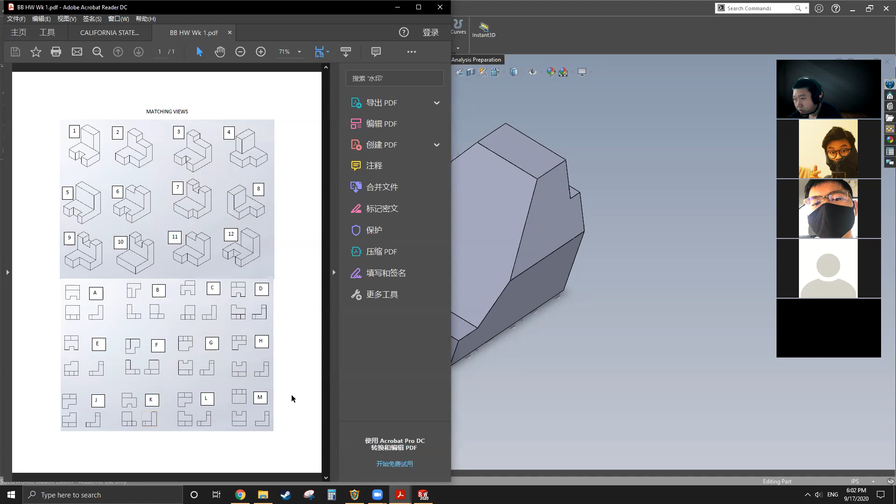You upload files. On Blackboard, you can easily upload a Word doc or a PDF or a text. Like how do you submit your other classes' homework if you don't use Blackboard? I'm confused because when I was attending Cal Poly, anything submitted to Blackboard was really straightforward. Lab reports and project reports and all the stuff we just submitted through Blackboard. We barely turned in hard copies. And this semester, a lot of students ask me how they submit their homework. So I'm confused. Is it something changed, or is it because it's your first year you don't know how to submit through Blackboard?

I think a lot of classes are using external apps. Oh, really? Like, for example, which one? Like Sapling Learning, My Math Lab, a bunch of different programs. Oh, I see. That's kind of advanced. I remember I only used some external apps for my physics and chemistry classes because they have their homework built in, the problem statement, and you just do the multiple choice or fill in the blank. But this one, you just click on homework one, and then you can browse your computer and upload the file you want to.

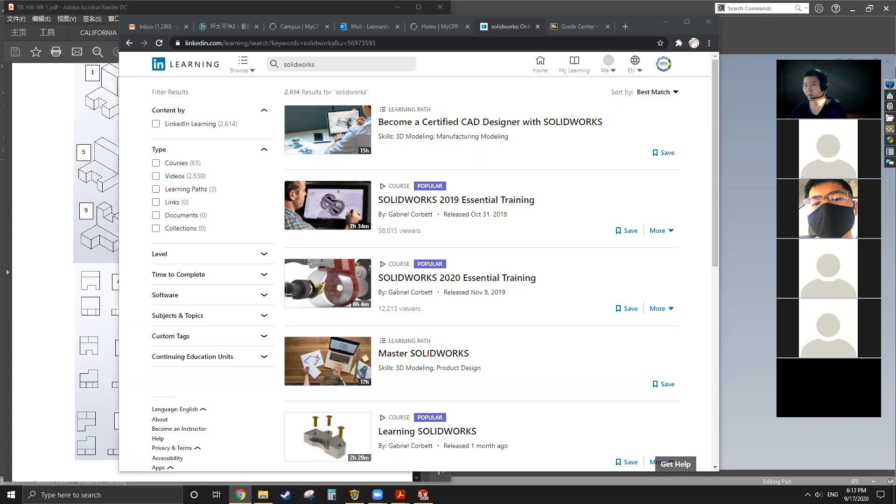I just want to know if somebody is really behind, so I can particularly help the individual. I don't want somebody falling behind since day one and they just keep falling behind and finally give up. So is there anybody who thinks he or she is falling behind a lot and needs extra help? If not, then I assume everybody is at the regular pace. Alrighty. Okay, that's cool. That really answers my question. Really appreciate that, you guys.

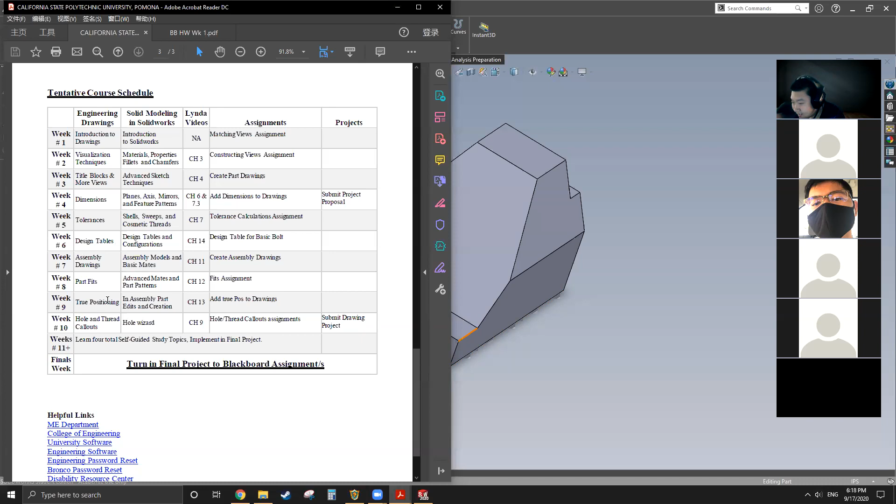All right, so today you can see I already have SolidWorks opened. This is a part that I just created randomly; it has no meaning, pretty much. I want to show you the modeling logic behind it before you start modeling. When you have a part like this, a very irregular shape, not symmetrical and pretty random, what do you think the first step is? Can somebody let me know in chat or by audio?

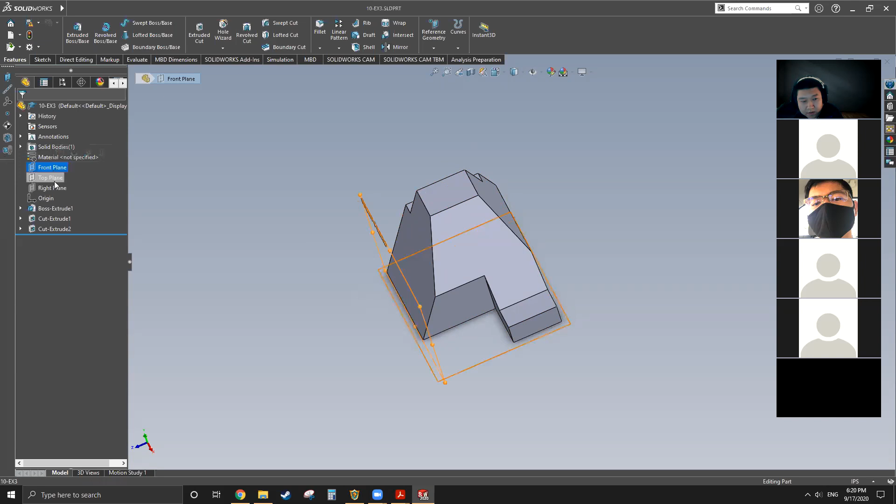Make a base. What kind of base? A flat one on the bottom. So you're saying making a 2D rectangle? Yeah. Yeah, actually I see this as a solid block. So yes, when I first see this, I probably will make a solid block. The 3 planes: this is front, this is top, and this is the right.

The reason I want to show you this is not to test you. It's because commonly after you get your job in industry, you will start making components. As a mechanical engineer, 90% of the time our job is using CAD to make the components and eventually assemblies, and to handle the full job later on.

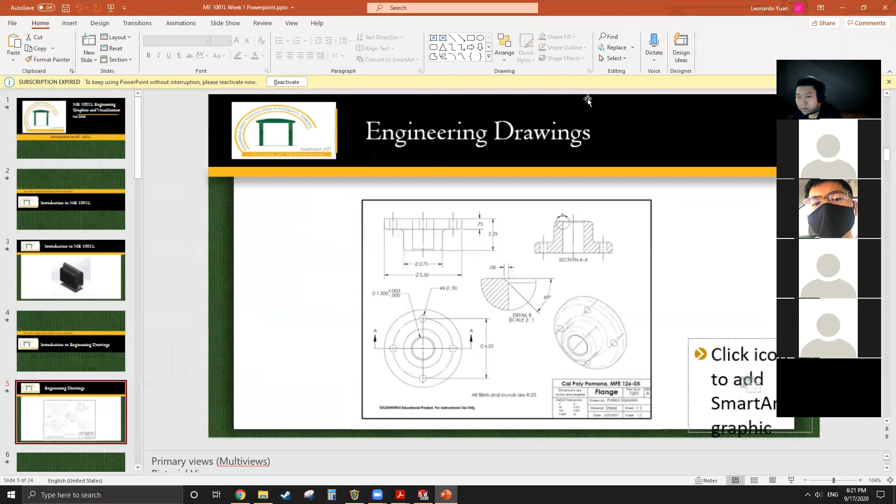So when your supervisor or manager tells you to create something, they won't just say, here, please go make this gear, or this pulley, and give you nothing to reference. Normally they will give you a 2D drawing, like a PDF, a piece of paper that has a machine drawing, exactly like the drawing we showed during the first week. Like this one. You receive a piece of paper like this, and they want you to make a 3D model based on this paper with all the dimensions.

Or if you're really entry level, they will give you a similar model because the company is making tons of those models, right? They want you to get an understanding of a model first and then make modifications to make your own project. So first of all, if you receive a model like this in SolidWorks, which is the SolidWorks part file, how do you understand this model and create a similar one with minor modifications from scratch? So this is the goal behind my question.

So I have seen people saying, okay, do a sketch from the side with most features and extrude. Yes, those are all right answers because there are definitely more than one way to do a model, as I demonstrated 2 weeks ago for the pulley. There are definitely more than 2 ways to do it, but I showed you guys both ways, right?

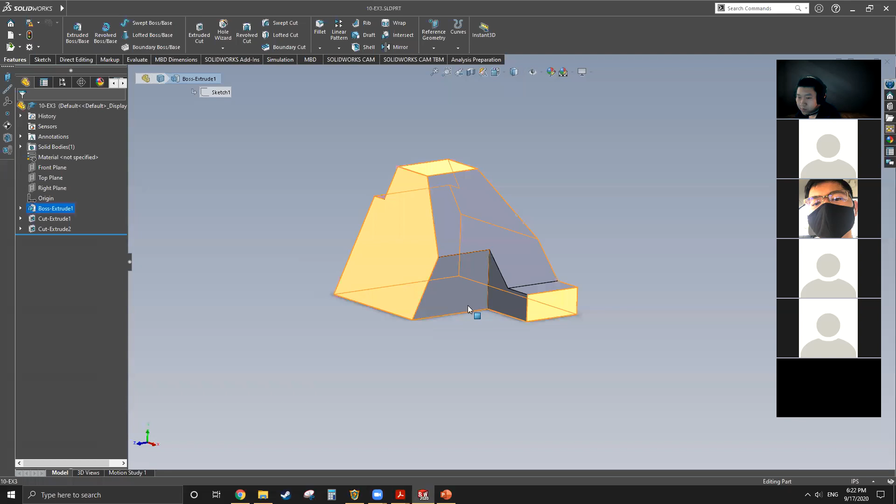So the first thing, when you have this model, you look at your feature tree to see what kind of features you have. And it has 3 features right here, 1 extrude and 2 cuts. When you click on an individual feature, you'll see the highlighted surfaces, which means this feature was created like this before they go into the next feature. And you can select the other 2 features at the same time and suppress them, which will yield you the first feature. And this is a block.

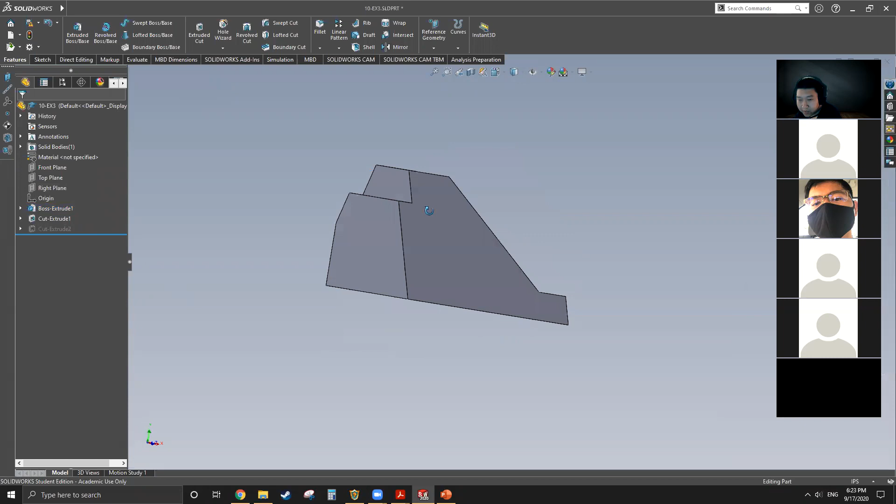I know it's a little bit tedious, maybe most of you guys already know this, but I just want you to know how to study, how to learn how to model from a model already created. So when you unsuppress the second feature, you'll see some material being removed, and it helps you shape this block a little bit toward your goal, right? And the third one eventually completes your object.

And you can also do it by moving this blue line. This blue line is like a finish line. Anything below the blue line is not considered in this model. So you can see we move up the blue line and the first feature is still a block, even though this part has already been completed. It has 2 more features, but these 2 are just not going to show. And this is the second step. And this is the third step.

So any questions so far? Nothing? Good.

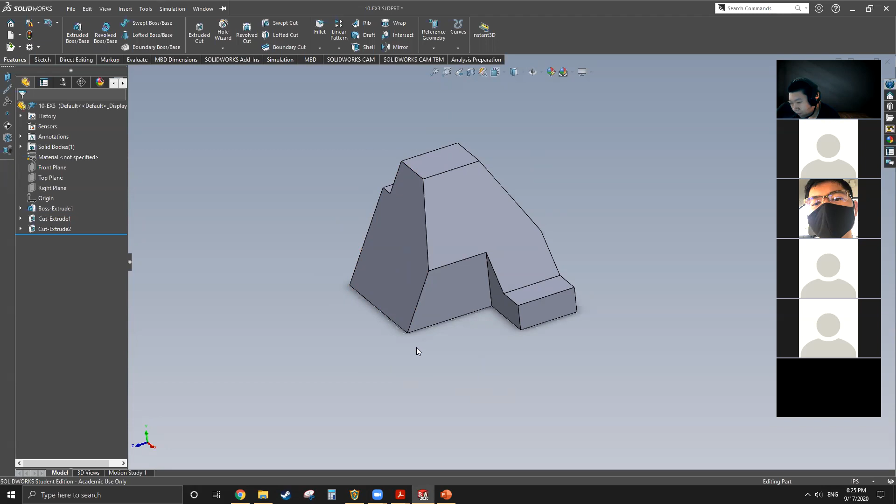So now I want to ask you guys, how many people can make this part in SolidWorks right now pretty quick? Because it's only 3 features, right? 1 extrude, 2 cuts, without any more demonstration. So the second cut is like this. And the first extrude is a block. Okay, that's good. If you're pretty confident and you think there's no difficulty, then you're good. You don't need to actually try it right now, but this is what I want to see. Great.

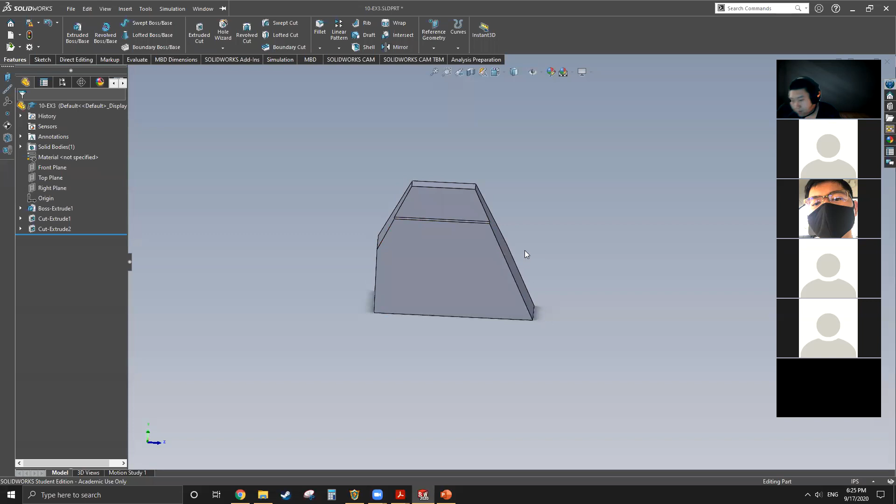Pretty much, in using software, the most important thing is confidence. You think you can do it, and eventually you can do it. Don't think once you get stuck, you're stuck there forever. It is not gonna happen.

All right, so let's make this one into a drawing. You see the new file icon. There's the drop-down list, and there is make drawing from part or assembly, and make assembly from part or assembly. So this week we're gonna use this one, make drawing from part or assembly, and next week we're gonna demonstrate this one. So we click on this.

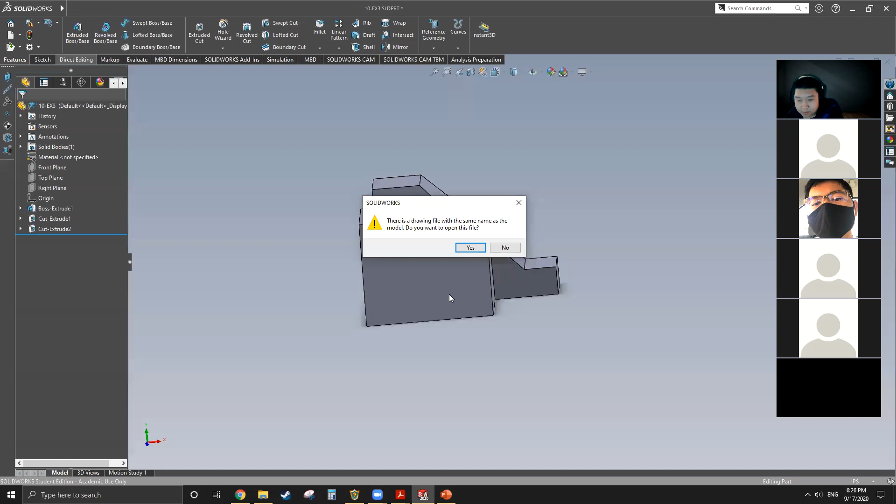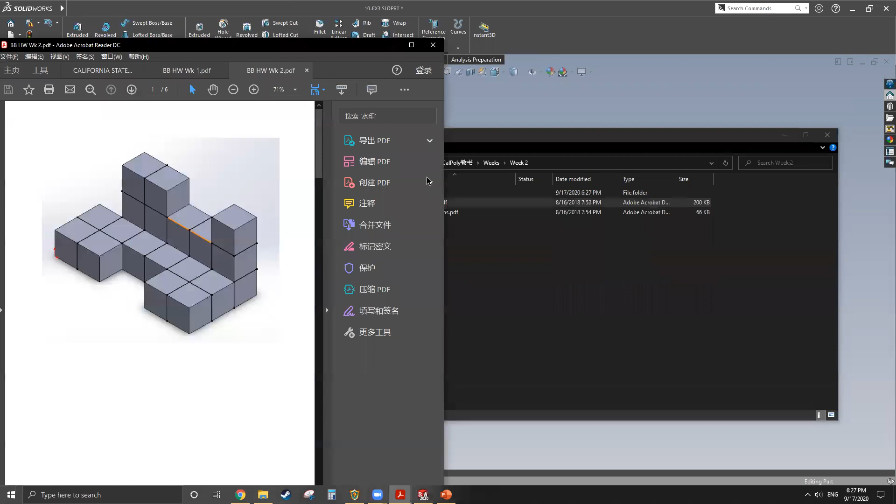Why this? Okay. Anyway, it's probably something left over from last week. I didn't clear. Huh. Okay. This one's stuck. I don't want to save. Oh. All right, this time's good. Okay.

So once we click that, it's gonna jump right into SolidWorks drawing. Yes, we're creating a new drawing. So this is a brand new drawing. That's why this window pops up. This is asking you to select a template. And a lot of you guys won't even have this concern, because when working, your company definitely has its own template. You don't have to create anything, and you just load what your manager tells you to load.

So this is a built-in template for SolidWorks, like default templates. They definitely have a lot, but the standard formats have 5 right here. So let's focus on the standard format. Right here it has ANSI, and it has BSI and other stuff, even GOST.

Let's just standard on the ISO format. You guys can see right here, this is the width and this is the height that represents how big this drawing sheet is.

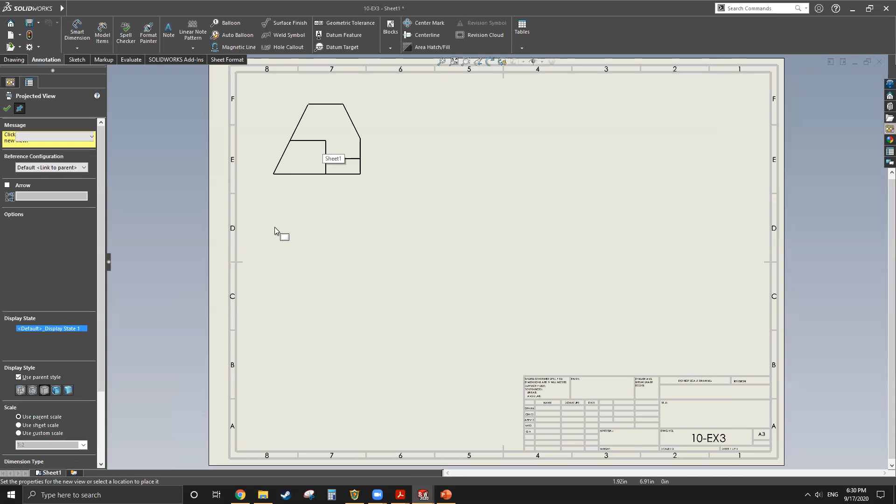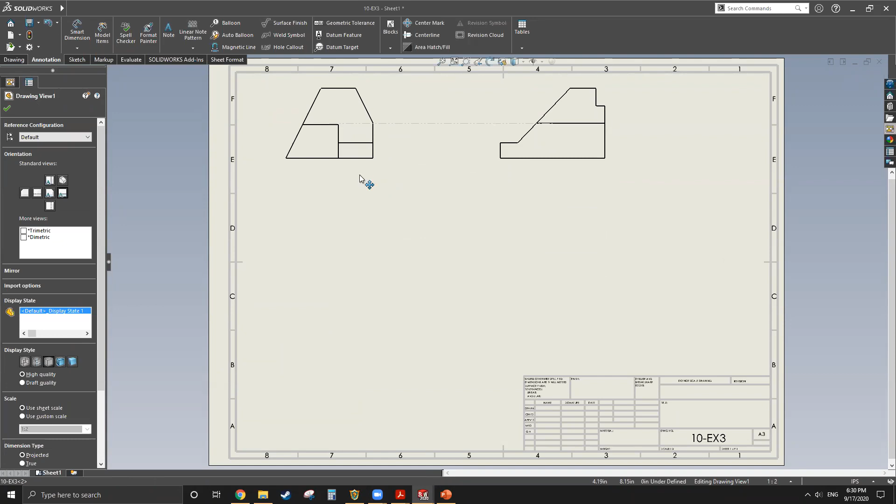So this projection right now is linked to this view right here. If you select it and move this view, you see there's a relationship bound by these two, they're moving simultaneously. If you want to create an independent view, you just come back here and you see the view already being in the drawing.

I've seen the drawing symbol right here, and now I want a top view, and I can just drag it. I will drag a top view right here. I think somehow I linked this top view with that projection.

This time I didn't link it, so now you can see I can move this all by itself. And these two are still linked together, but this one is all independent. So it's your personal preference, do whatever you like. There's nothing wrong with it, but just so you know why this one is linked and this one's not linked.

So let's click on this one and view the properties. The properties right here say reference configuration default, of course there's no other options. And right here you can change your view. So right here, this one says right, you're currently at right, and you can change it to front, left, back, something like that.

And display state, state one, and display style. Here's multiple styles: wireframe, hidden line, and this one is hidden line removed. Let's just do wireframe, hidden line removed, shade without edge. You can see this one changed with this one because right now they are referencing each other.

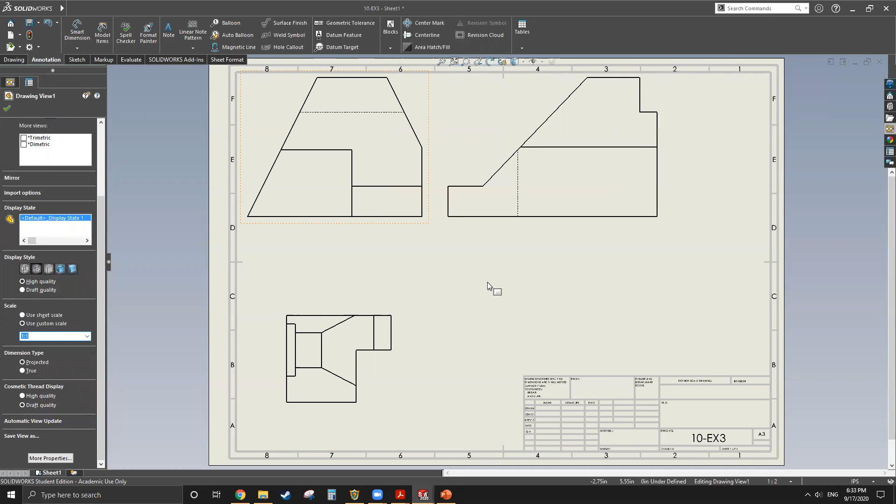Since this template is pretty small, let's use sheet scale so it looks more comfortable, right? And dimension type, you can leave it as projected, and later on I'll show you how to create the true dimensions. And draft quality, if you want your computer to run faster, just do draft quality.

So pretty much that's it. And you got to change this one manually as well because it's independent. Let me turn on light. Just do the same, pretty much, to change the display style. And it remains the same because there's no hole or anything, so therefore there's no hidden line.

So any questions so far by creating 3 projections?

Okay, no questions? Let me zoom out a little bit. Now you can see we have 3 projections. This is pretty much the basic of our drawing.

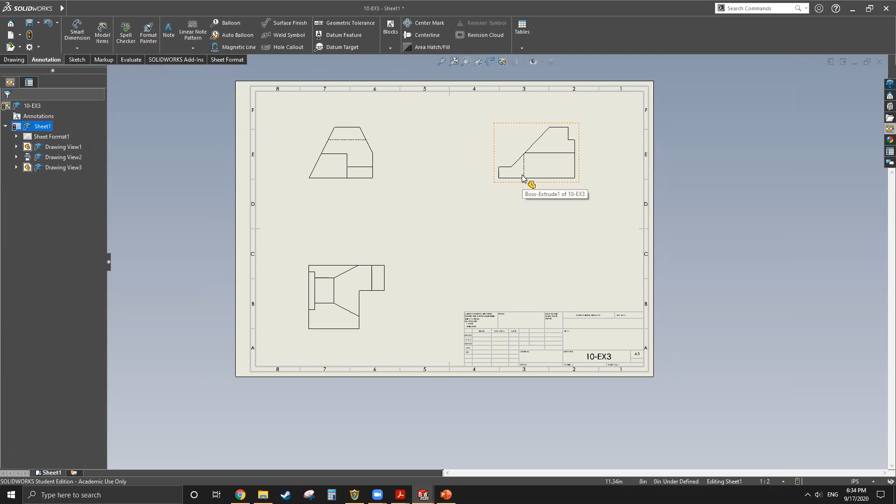Let's move to the title block. Once you've imported your model, it's even more important to identify your title block because this is all the information about this drawing, the meaning of what you're creating. You can see there are a lot of boxes, and you don't need to worry about most of them. There are only a few that are really important.

The drawing number is kind of like the driver's license number for this drawing. It's unique to every drawing. You can't create the same drawing number for multiple drawings at the same company. This is like its own ID number, and it will be in your system. Every time anybody asks you to pull out a drawing, they're going to provide the drawing number.

They can't just say, 'Oh, I want that 5 inch pulley, can you pull that drawing for me?' You're going to ask, 'What's the drawing number?' If you can't provide it, that's definitely going to be a nightmare because you'll probably take a whole lot of time. So the drawing number is very important, unique, along with the title.

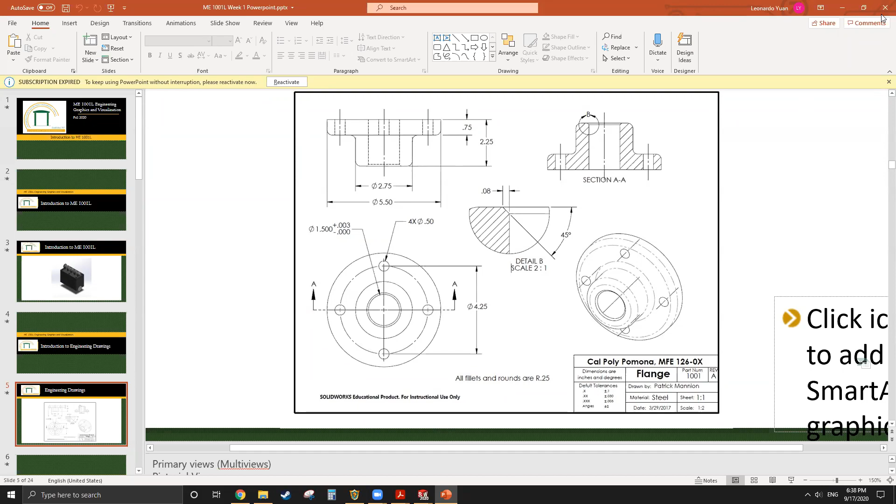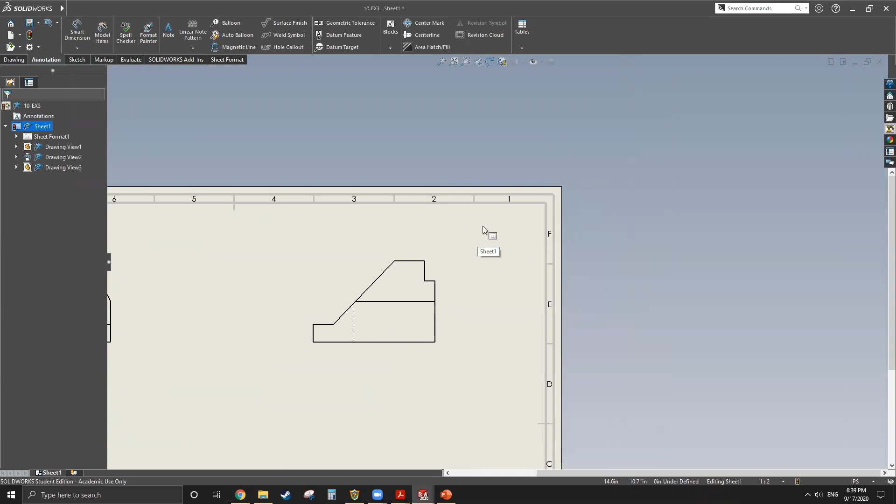And finish - I think this means surface finish or surface roughness. I don't know, I've never seen this box filled in on a title block, to be honest, because surface finish normally goes along with materials. If you want special coating, hard face, plating, or whatever, it goes on your material code. And if it's talking about surface roughness, normally that goes on the note - it would say the surface roughness will be 63 or 125 except as specified, something like that. So I've never seen this, I'm not sure what exactly should go here.

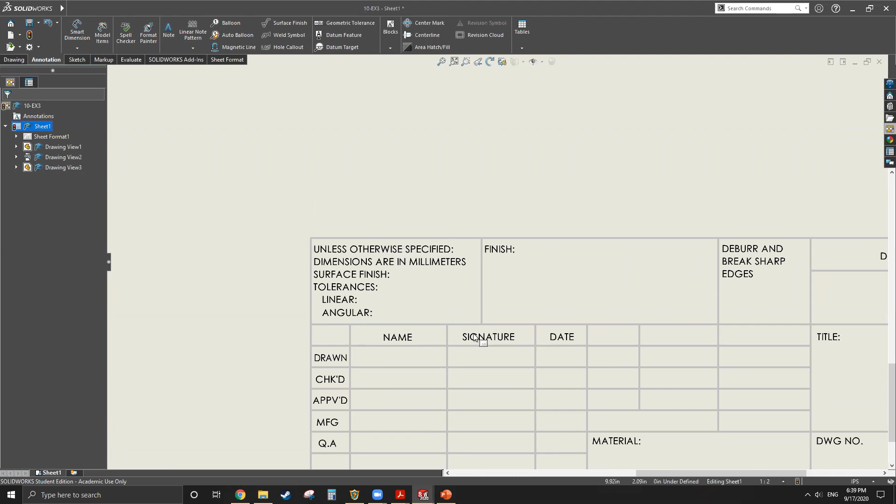This one right here is talking about default tolerances, the angular or linear tolerances that this drawing defaults to. It really depends on what kind of standard your company is following, like ASME. The default tolerances are very similar to this one.

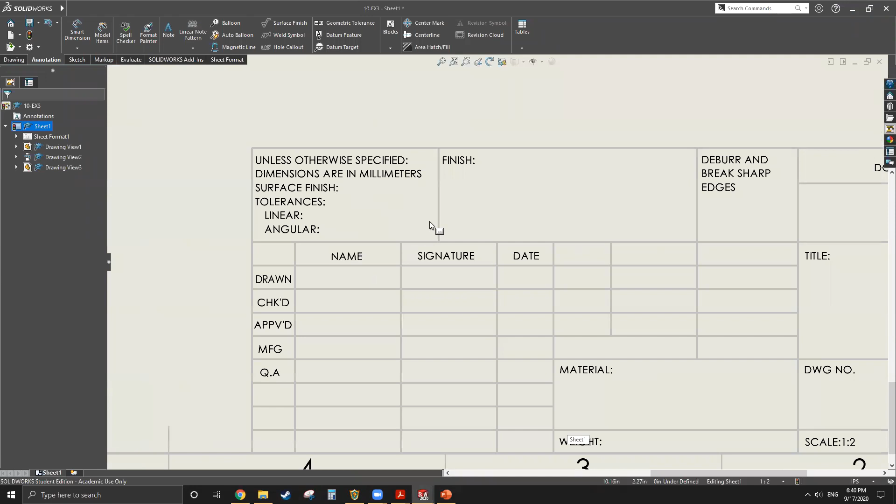If you can see right here, the default tolerance for 1 decimal place is 0.1, which is 100 thou, 2 decimal places is 0.03, which is 30 thousandths of an inch, and 3 decimal places is 5 thou, something like this. But you don't need to worry about it - it's your company's design protocol that calls this out, and it will be automatically filled in when you're using your company's template. So don't worry about this one.

Another really important thing is right here. Normally it only shows 3 rows right here. It has 5 rows total, but normally only the first 3 rows are shown.

So whoever draws this drawing is the originator, that's you. You put your name right here, put the date, and sign it once it's ready for check. Whoever checks it is normally your peer or supervisor, and they sign it after completing the check. Whoever approves it means this drawing is ready for manufacturing.

This approval signature is normally your department manager, because he's saying this drawing is going to be released to purchasing or manufacturing, out of engineering. So your manager signs right here. Who manufactured it, I don't care - normally that's not on the drawing. And QA or QC have their own checklists and templates; normally they won't mark up anything on the drawing. The drawing is fully controlled by engineering.

When you see all the names signed, that means this drawing is ready, and you can estimate which step this drawing is in. If all the names are signed, this drawing is complete and they already made this part. If it's just been approved, that means this drawing is not being machined yet.

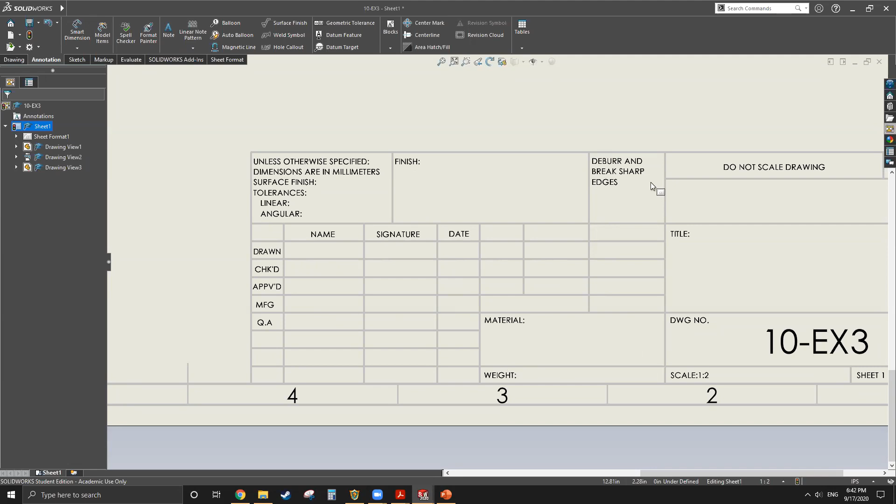Material and weight normally don't show on this drawing because right now, in standard industry, one drawing is created for at least more than a dozen materials, so we won't specify any material, at least not in the title block.

If it's really specified just for one project, normally it's in the notes saying this particular part is just designed for this material. And the weight normally isn't on the drawing because this drawing could be made of different materials - how can you estimate the weight?

So let's fill out the title block as much as we could, and all the areas that we care about, okay?

So when we right click the title block, there's an 'edit sheet format' option, and you click it, and now you can see your drawing is sort of gone. Don't worry about it, it's because you're in the mode of editing this template. So pretty much you can modify this title block, but it's gonna take some time and it's not that important, because you're gonna have your company's own template anyway.

So let's start with the drawing number, let's get this modified. From my company, normally our drawing number is one letter - A, B, C, D, or K - followed by a 5-digit number. The reason we set it up this way is the same as with the sheet template.

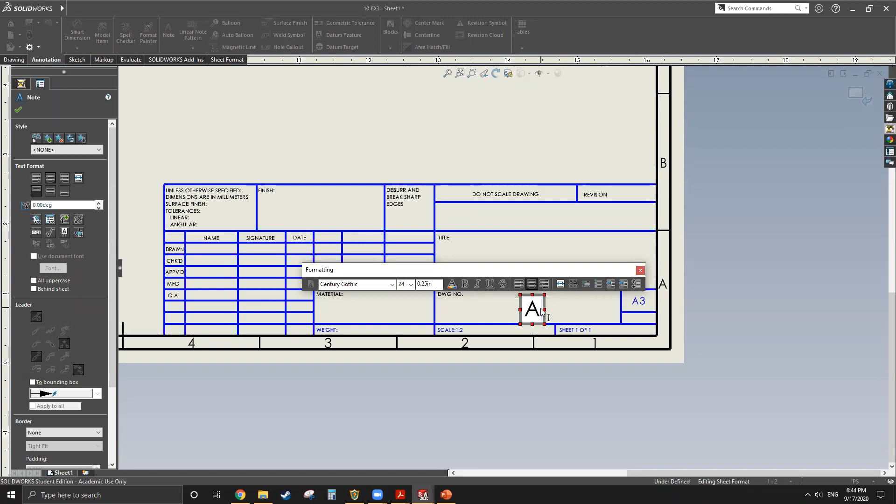If this part is very small, we're gonna mark it as A, meaning this drawing uses template A because it's a small part printed on small paper, 8x11, that's why it's A. If it's B, then it's gonna be printed on a B-size paper - I believe it's like 17 by 11 or something like that, so it's a B. So for this one, let's do A001.

And pay attention, this is gonna be unique, so you can't create a different drawing that's still using this same drawing number.

And the title, let's say 'example part,' because I don't know what that part is gonna be useful for - it's kind of like a weird shaped pyramid. And revision, as we mentioned before, definitely 0, since this is freshly just made.

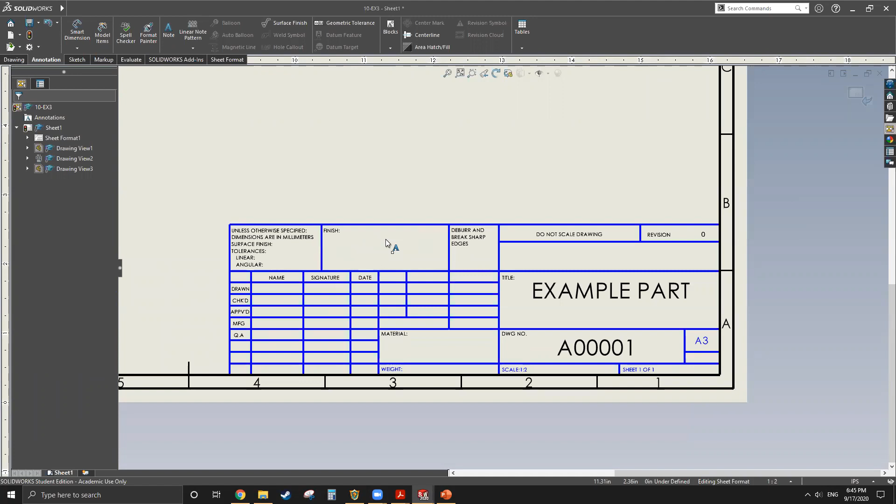So finish, we're not gonna fill in that, or maybe we could, but I still don't know what it means - like, say, we could do chrome oxide hardface. And material, let's do 316 stainless steel. And 'drawn by', I'll put my initials right there.

And fill in today's date. So to be honest, I'm not gonna require you guys to fully fill this title block - just have a drawing number, title, your name, and revision 0. That's pretty good for me, and that's pretty much what you're gonna fill in a title block when you get a job.

So any questions about this title block?

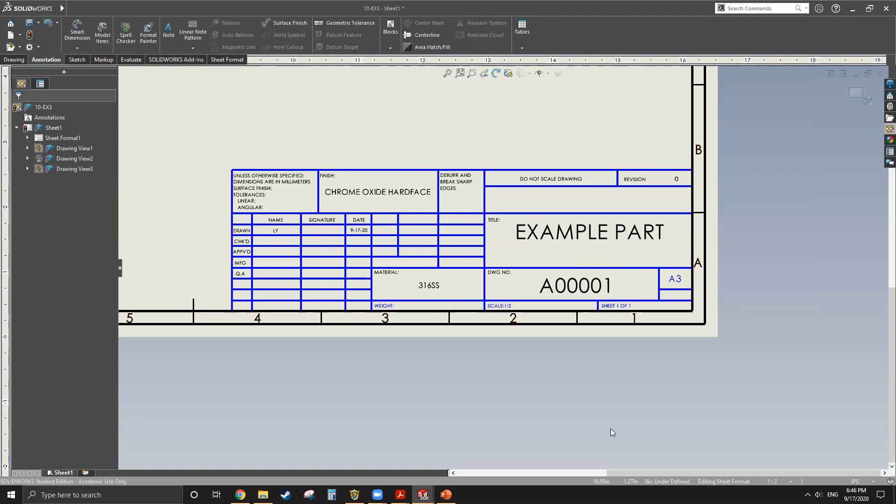Most of the stuff is stuff that your company would tell you, right? Sorry, can you repeat it? Well, most of the stuff is stuff that your company would have a format to tell you, right? Yeah, of course. Your company will have a very specified format.

My command manager moved to the right. No, like the top commands, right there, it moved to the right. I don't know why. It just moved to the right for some reason. I have no idea, man. I can't even visualize your problem. Yeah, it's hard to describe. It's just everything from the top, like smart dimensions, all that stuff.

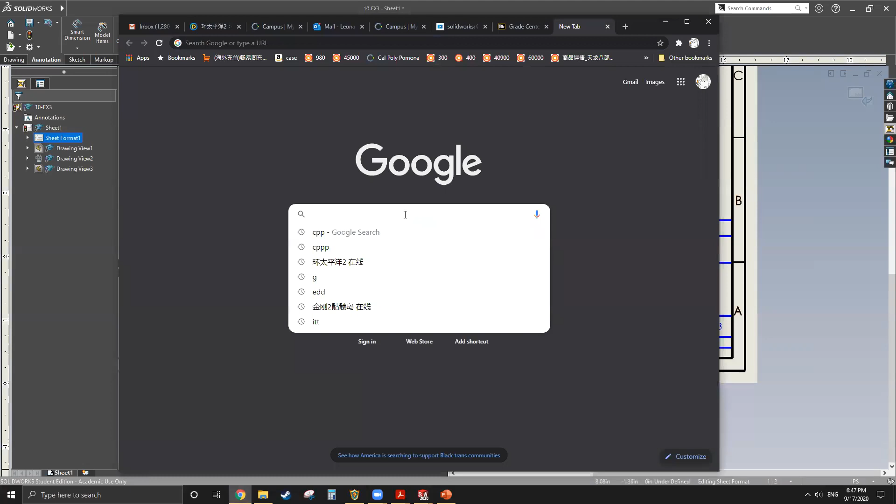When you have some concern which is a little bit weird, type in Google, like your command manager moved to the right. How to drag command manager back to top. So watch this video, 2 minutes, you'll get your command manager back to top. All right, thanks. Sorry. Yeah, no problem. It looked so weird. It just started out like this. Thank you.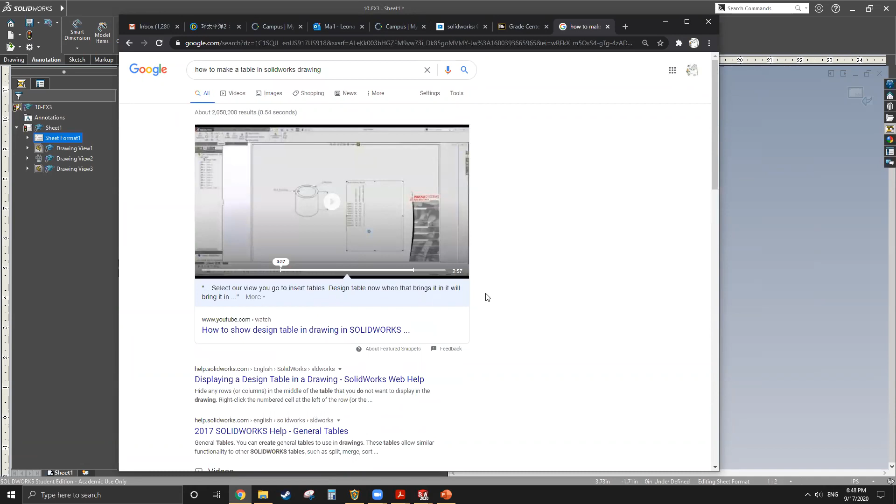Any other questions about title block? Okay. Oh, and a little thing off tangent I want to mention is don't hesitate to use Google or YouTube for help. Even during daily work, I still have problems with Creo or Ansys, and I use Google and YouTube a lot to figure out my question. So, for example, how to make a table in SolidWorks, and it will just tell you right away, 2 minutes. You know more than everybody how to make a table.

And I receive a lot of student emails saying their SolidWorks is giving a warning or something like that. If I encountered the problem, I know the answer, I'll tell you. But if I never encountered the problem, I really have no answers. And the best way I found out is Google, right? So definitely you can Google it and get the same solution. So just don't be shy to use the tools as your best friend. All right.

So if there's no more questions, the title block is complete. And you can see right here is a return to drawing symbol right next to the close or minimize. You just click it and your drawing will be back. And every time you need to do some modifications to the text, you just right click and edit sheet format, and you can start from there. All right. So what are we missing now?

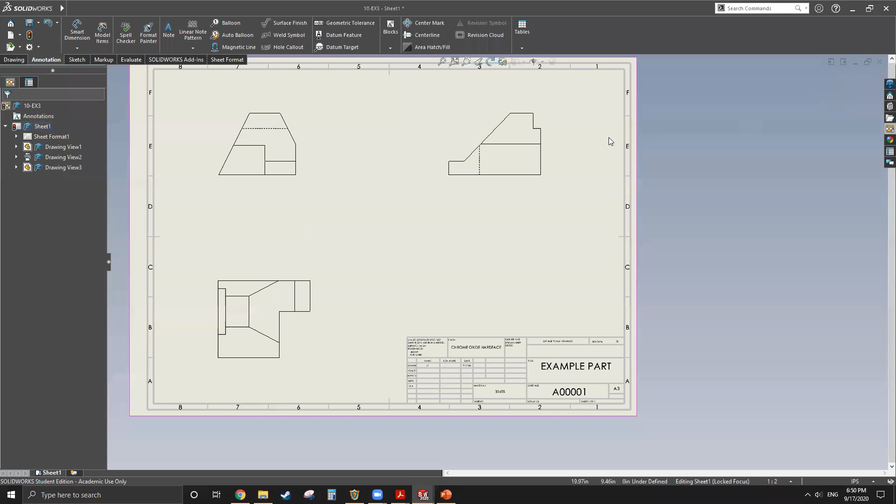We are missing dimensions, right? The most important thing for drawing. There are definitely more than 3 ways to insert dimensions. So the first way I try to show you guys is import annotations from here. But normally I don't do that because I want to make sure my drawing views displayed okay, and then I do dimensions. But you can try that way. Maybe that's more efficient. So a second way to do it is import options.

So you click on the drawing, the property manager shows up, and import options give you different options to import annotations. Yes, and smart dimensions will be 5 minutes later. So you click import annotations, and you can try different things to see what's gonna show up. Include items from hidden features and 3D view annotations, these two won't take anything because we didn't create it. Design annotations shows dimensions right here. However, it's only on this view, right? If we unclick those, it doesn't go away. Okay, it is good.

So if we want to show dimensions for all 3 views, we can go annotation, model items, and click right here. And the source, we select entire model. And dimensions, we can definitely click all of those, even though some of the stuff we didn't create, so it won't even show. Let's just select all, why not, right? So everything will be shown. So here we go. All dimensions popped up.

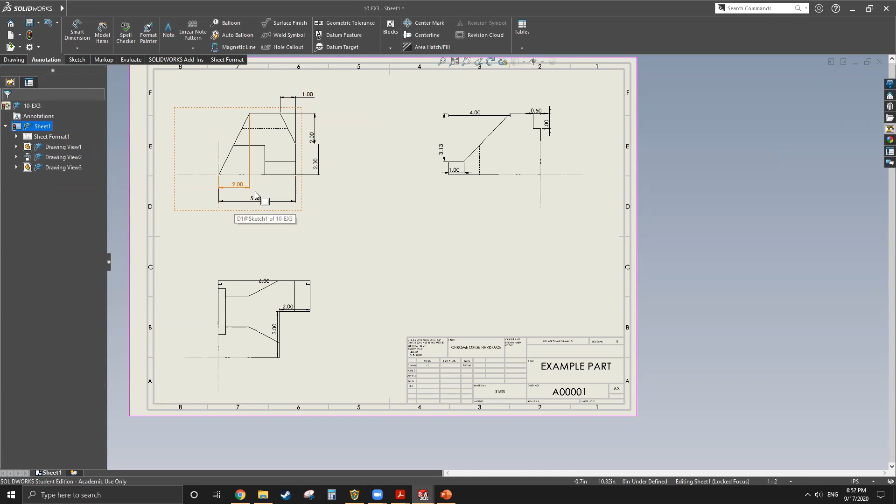And you can see the display on projections is a little bit weird. It's because when we do the model items, we select all, right? And right here is notes, surface finish, tolerance, datum, datum targets and weld symbols, everything. And right here is plane, axis, coordinates, right? This one showed up because of the coordinate system, and we want to get rid of that. You move to sketch. Or you don't have to move to sketch, I guess.

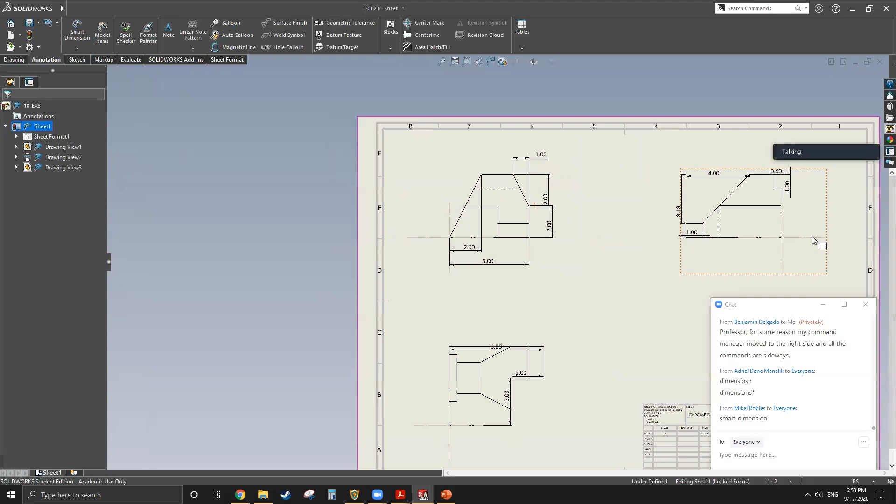Yeah. It'll take multiple clicks to get it selected, and you just delete it. Hit the delete key on your keyboard. Yep. This one as well. Get rid of the coordinate system. Alrighty. So now we have the dimensions showed up here.

And any questions so far? We're not finished with dimensions yet, but I want to know if you guys are all comfortable so far. Okay, thank you.

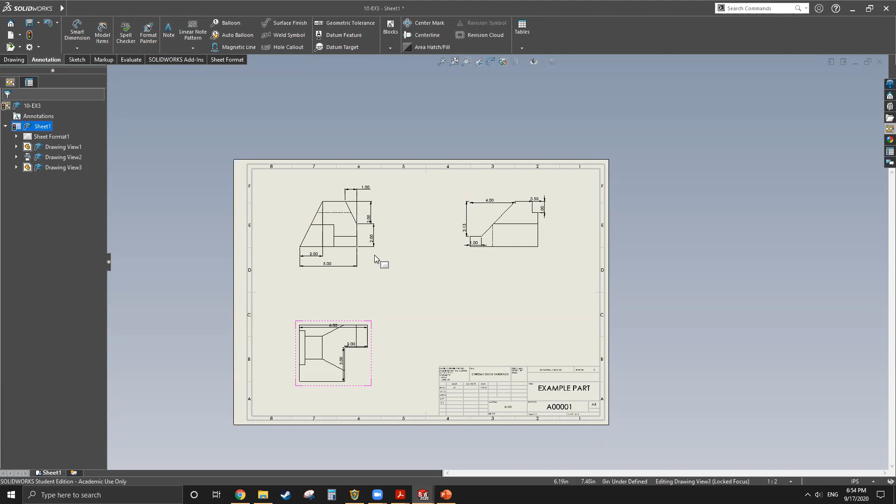So somebody mentioned smart dimensions, and smart dimension is right next to model items. What does the smart dimension do? Let's try it out. So from this edge to this point is 1, and let's create just the same dimension. So let's click yes first. So you will see one is dimmed and one is bold, right? Why is one dimmed, one bold?

Anybody know? Any guess? Or let's do something different. For example, this angle. This angle never had a dimension on this drawing, right? It's still dim. Okay, it's pretty close, Robles saying it's a measurement. Okay, yeah, you guys are getting there.

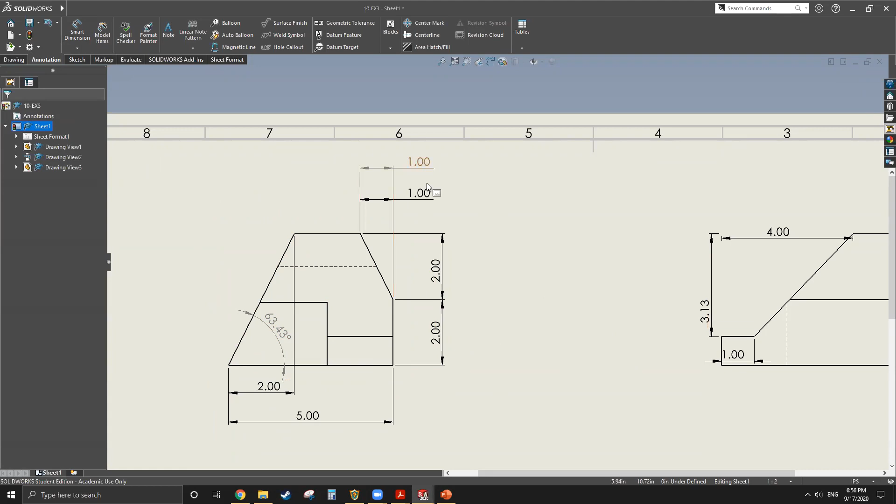So pretty much one means this is a driving dimension and this is a driven dimension. So it's similar to strong dimension and weak dimension. So the strong dimension, which is the driving dimension, is controlling the model. This one is just a measurement. This one tells you how much is from this edge to this point, and it doesn't do anything. It has no function at all.

So let's double click this. When you see the property menu at the left, you see the magnitude is dimmed. That means you cannot change it. The only thing you can change on this dimension is like adding a text. If you say reference, it's gonna show a reference after the 1.00. All right.

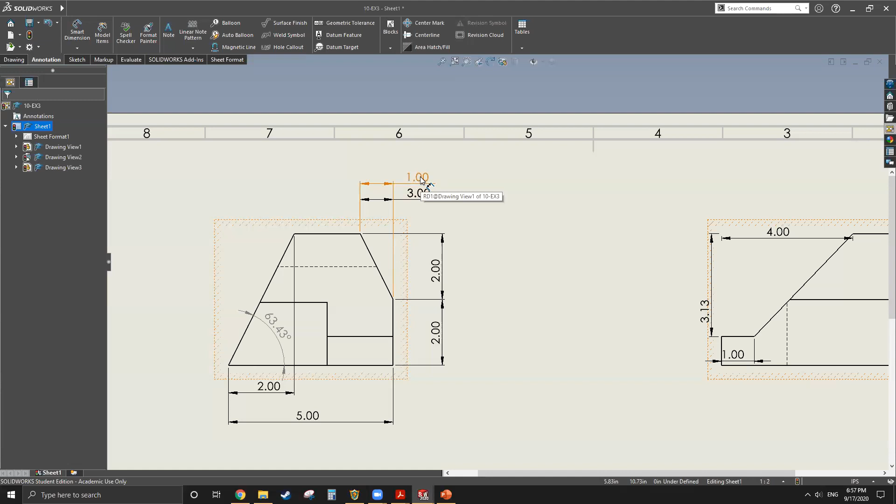But if we double click a driving dimension, you can change it. And let's change it from 1 to 3. So it changed to 3, but does it look like 3 from this edge to this point? This is still telling you it's 1, right? So this one just the number changed to 3. The model doesn't change. And if you hold Control and Q, so you Control Q it, why doesn't it regenerate? Huh?

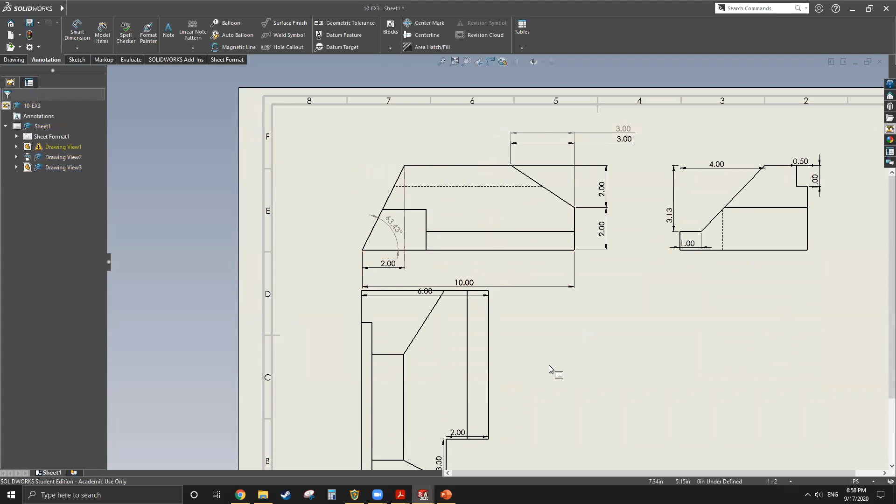Oh, my bad. Yeah, I forgot. This 3 is constrained because this 3 is actually part of the 10. It used to be 5. If we don't change that 5, that 3 is not going to change because it's going to completely twist the model. So sorry, the bad example I chose. Let me drag this there.

All right, so you see, if we change a strong dimension, okay, this is a pretty good question. Should we use strong or weak dimensions? Actually, it doesn't matter, because every time you're presenting your drawing, it's already a piece of paper. It's printed out as a PDF or something like that, and people cannot identify which dimension you're using.

But the good practice is always use strong dimensions, because when you try to make some modifications or stuff like that, it always reflects on your drawing and it reflects back to your model. There won't be any confusion, you know?

And also, almost half of the time, the strong dimensions are not enough. Even though your model is fully defined by all the strong dimensions, right? You still want to show a little bit more on your drawing. Sometimes, half of the time. So half of the time it's always the strong dimension plus weak dimension that represents your drawing. Any question?

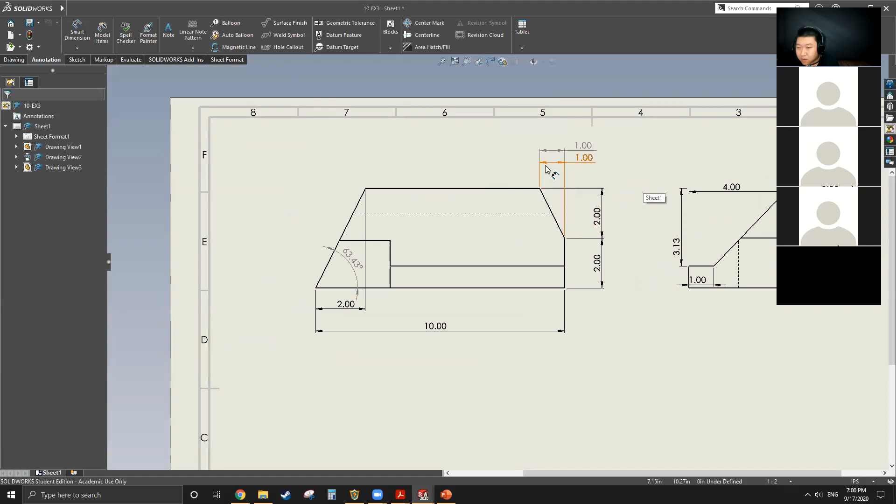Okay. So this is the difference between a strong and weak dimension, just to show it a little bit. Let's change it back, Control Q, and this back to 1, right? And we want this back to 5, and Control Q, and it's back to 5. Okay.

One question I want to ask you guys. So for example, the total height of the subject is 4, right? 2 plus 2, that's 4. And in this projection, maybe this is the front view. The front view here, from the top to this step right here is 3 1/8. Why is there no dimension on this remaining part right here?

If I label it out by the Smart Dimension tool, why is this 0.87, 7/8 of an inch, never shown on this drawing? And do we need to show this on the drawing? Yes, you both are right. And are there any other reasons besides these two?

Yes, Michael really hits a point. It's already defined. So this model has already been defined. If we put one extra dimension right here, what kind of consequences are you gonna get? The model will be over-defined. What does over-defined mean? It means there will be a contradiction.

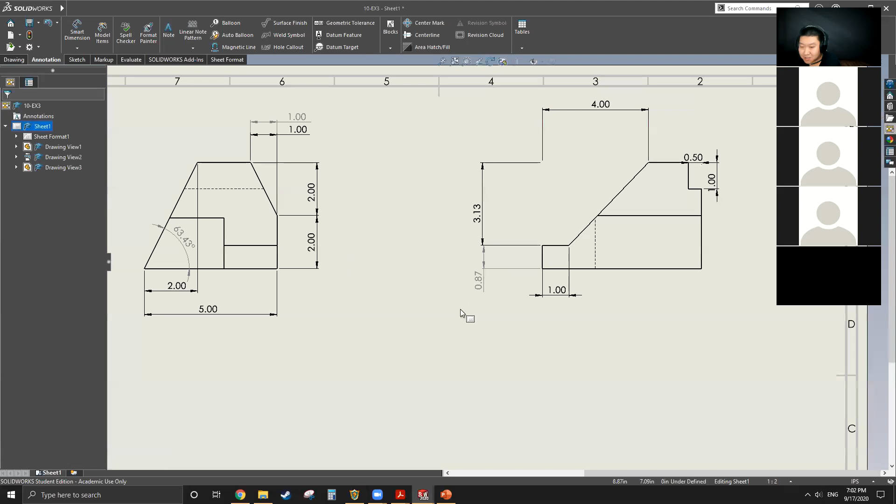So for example, let's come back to this drawing. The default tolerances, let's store this one to our current drawing, okay? So let's use these default tolerances. And our dimensions, they all have 2 decimal places. So 2 decimal places have a tolerance of 30 thou.

30 thou means, for example, this 2 can go as much as 2 plus 0.03, 2.03, or the minimum, it can go 2 minus 0.03 as 1.97. So the machinist will have a total range from 1.97 to 2.03 to machine this dimension. So when we receive the part, if this is not 2 but 1.98, it's okay. They still did their job. You can't deny this part. And same for this dimension.

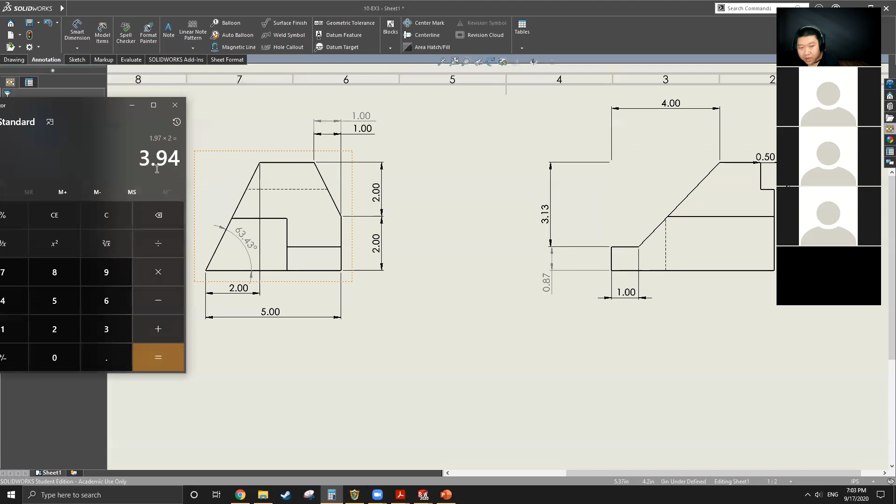So how much does the tolerance add up? So maximum is 2.03 plus 2.03, 4.06, right? So the total height of this part can be as much as 4.06 and as minimum as 3.94. Okay? And why I mentioned this range? Let's take it down. 3.94 to 4.06 as height, right? And this dimension is 3.13. And 3.13 with plus or minus 30 thou will give you the range 3.10 to 3.16. Am I correct?

So if we have this 0.87 right here as a defined dimension, we will be in trouble. What kind of trouble? So if this height reaches its maximum, 4.06, and the 3.13 value reaches its minimum, which is 3.1, that gives you 0.96. Does 0.96 make this 0.87 valid? Of course not, right? This 0.87 will have the same default tolerance as the other two decimal place dimensions, which is plus minus 30 thou, right?

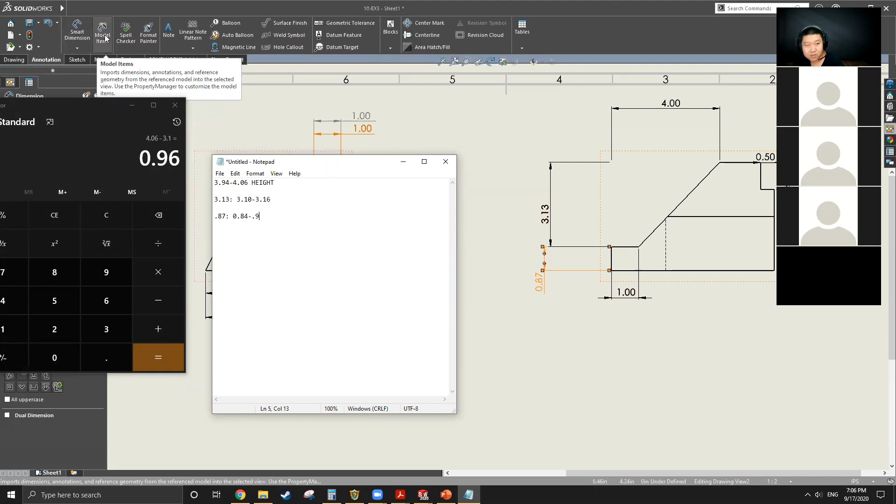No. It's shaded because it's created by me. It is a weak dimension. It's created by the smart dimension feature. It's not created by model items. The model items generate strong dimensions, which control the model. And the weak dimension is just a measurement. It's kind of like a reference. All right. Is it clear?

Nope. To answer your question, the 3.13 and 0.87, they're equally important. So you can either label the 0.87 or the 3.13. It just depends on which way you modeled it, right? Because like I said, when you generate the model, the dimension you used is the driving dimension, and it's gonna show up right here by the model items. So in the model, I generated this slope by 3.13. I didn't generate this step by 0.87. So that's why 3.13 shows up instead of this 0.87.

Okay, there's no question. Let's move on. So today is gonna be pretty straightforward because we're dealing with a very easy subject. There's no circular shape, so we don't need to add anything to the note. You can see down below, there are a lot of things like the center line and plus minus and the degree and the diameter. You click it and then it adds up right here. You want to delete it, you just delete it. So today we're not gonna use those symbols, but I just want to tell you guys where you can find those symbols and do your own modifications to your own drawing.

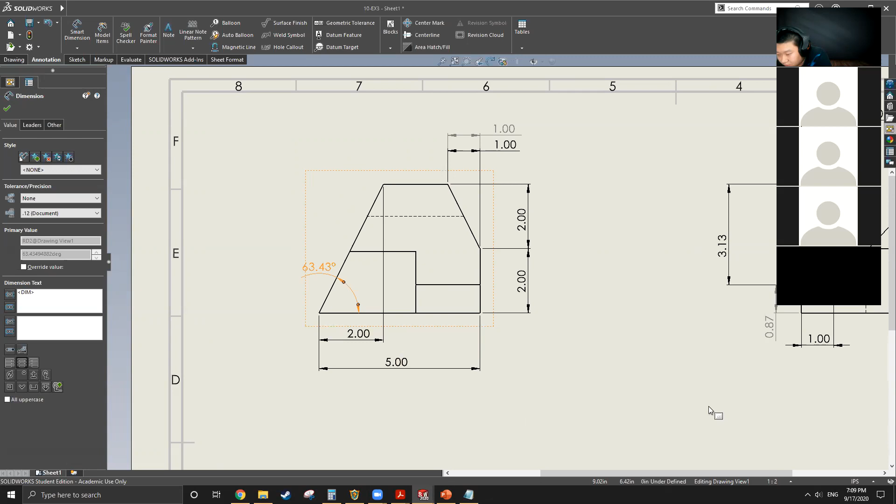If you want to get a strong dimension angle notation manually, I have to go back to my model and change the way I model, because, for example, this model I made by an extrude followed by 2 cuts, right? If I want to show that angle dimension as a strong dimension, I need to model this differently. I need to model this starting with an angle. And that's gonna take a whole lot of time. All right, I hope that answers your question.

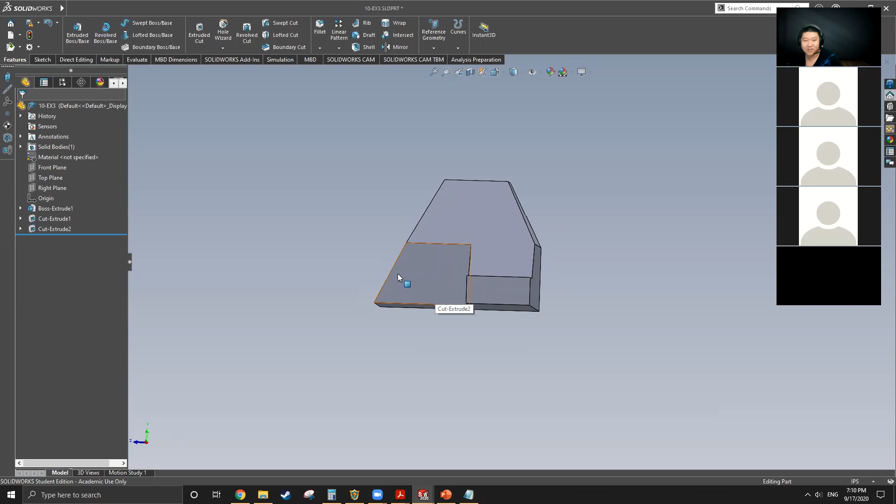Yes, that's why the strong dimension can change your model, right? I just showed you, if you change your strong dimension to 10, it's gonna be expanded to a very fat part. And if you go back to your model, it's like a giant sandwich, right? Yes.

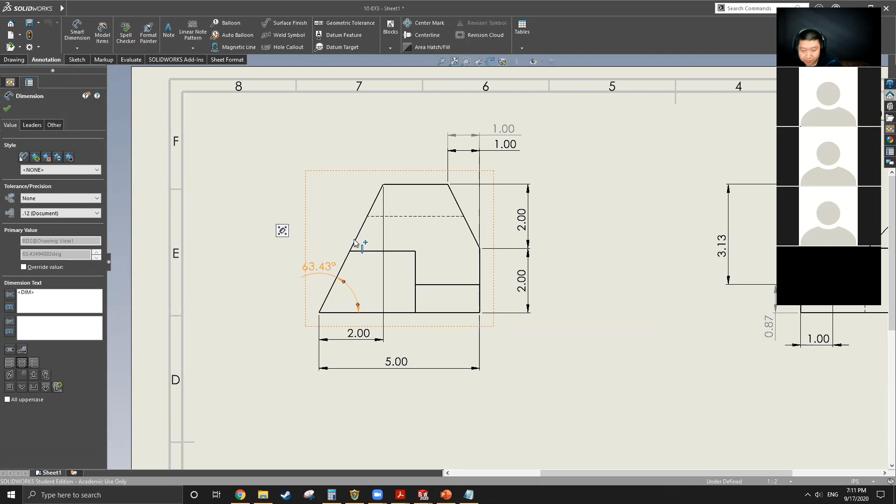So let me continue on the annotation. I want to talk about this one. There's one other type of dimension called reference dimension. Let's not use this. Let's use this. This is a better example because we just went through the potential contradiction of this dimension existing, right? So for example, I really like this 7/8 of an inch to show up on this drawing. What should I do? I can't just leave it like this, right? Because after it's printed out, it has the same meaning as a strong dimension. The machinists will get so confused. So what can I do?

All right, this is called a reference dimension. Let's put a parenthesis. So when you see a parenthesis on a dimension, that means this dimension is a reference dimension. Reference dimension means this is a reference. I'm just telling you it's 7/8 of an inch. So I'm not controlling by this dimension. So if this distance after machining happens to be 1, 1 and 7/8 is a huge difference, right? There's a 1/8 inch difference. That's still okay. It's still legal because it's just a reference dimension.

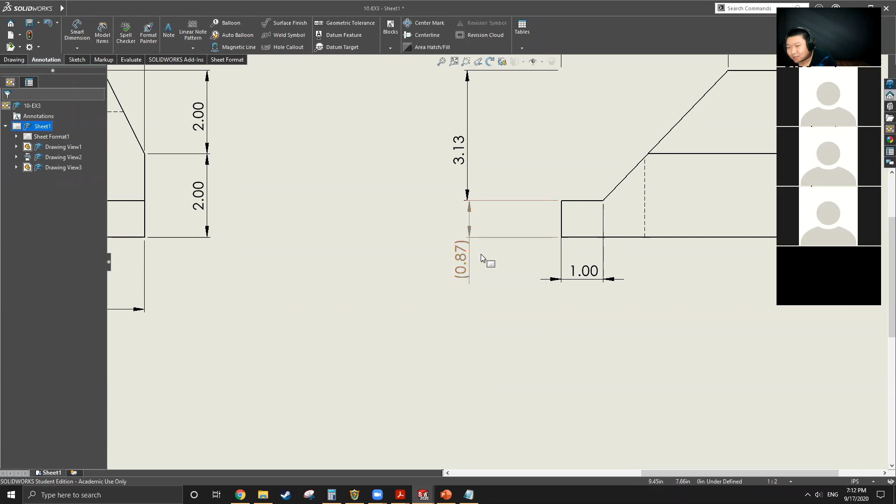I'm just telling you this is supposed to be around 0.87. Even though you made it a little bit off, more than the tolerance should be, that's okay. But if this one is not 0.87 after it's been made, it's like 4, that's definitely not okay. Because the machinist would instantly know he made a mistake by looking at this drawing, right? It should be fairly close, just with no tolerance to control it. So this is a type of dimension as well. All right.

And there are other dimensions like basic dimension, and we're not going to cover that here because normally that's for more industrial things. In this class we will never get that deep. All right, so let's take those off because we don't need them. And this one, if you'd like to show it as a reference dimension, you could, but apparently we don't need it.

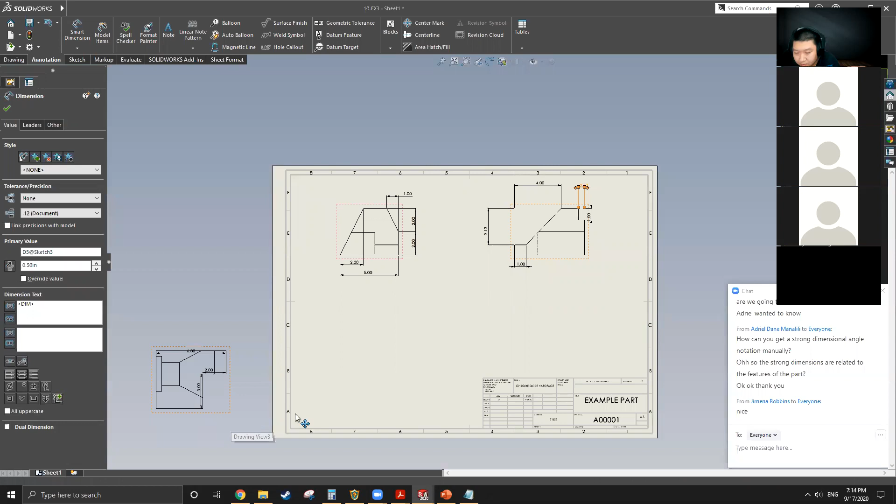So one more important thing is, how do you know your model is fully defined? Every time you import your strong dimensions or driving dimensions, you still don't know if this drawing is fully defined or not. The best way to learn it is after you get a job, you do similar drawings over and over again. Then you will memorize which dimensions should be on there and which should not. So pretty much after you import the dimensions, you take a closer look.

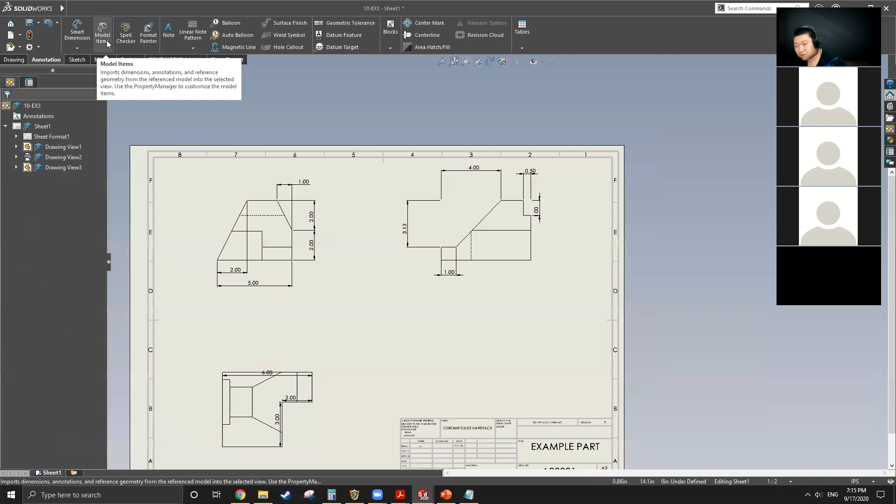For example, okay, this line has no dimension, the top edge, how long should that be? Is this fully controlled? Okay, I see the 5, I see the 2, I see the 1. Okay, this one is fully controlled, right? And from this step to the bottom, there's no dimension. Is this one fully defined? I see the 1, I see the 4. Okay, it's fully defined. So test yourself like this, because sometimes when the model gets too complicated, it's not fully defined by just importing. So don't rely on this too much, as this button is not once and for all. You still need to have your own judgment. Okay? All right.

Now let's go to some detail, some practice. So first thing, don't have your leader line go across the drawing. For example, this one right here, the leader line goes to this point, right? But your leader line is crossing the drawing. If you have no choice, you can do that. But I encourage you guys, if there's another way out, please rearrange your dimension, because this is really confusing to somebody. They may confuse this with an edge line. So move this to the top. So you can see it's no longer going across, right?

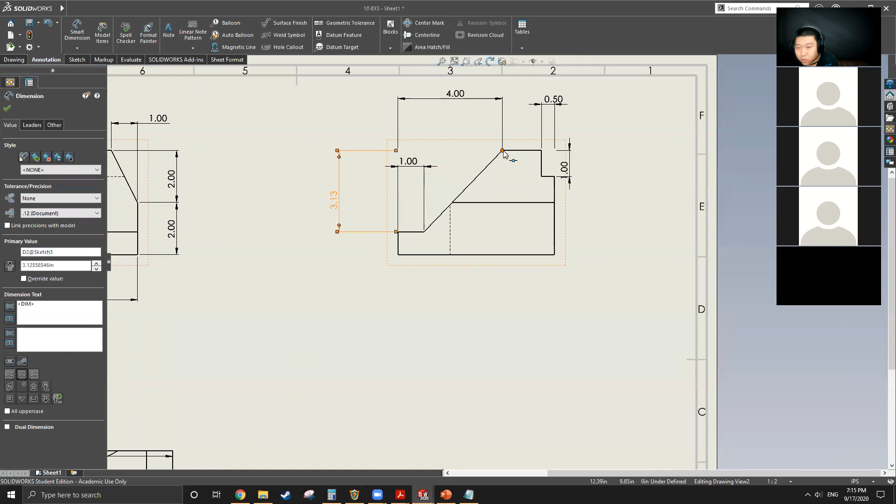And this one, the leader line is way too far from this edge. So you need to manually drag it, extend it to get it close, but not touching. And same here, drag it. And this 0.5 definitely is too wide to fit in between, right? So just put it on the side. And same one right here. So just make it as neat as possible, because it leaves a good impression on whoever is viewing this drawing, you know?

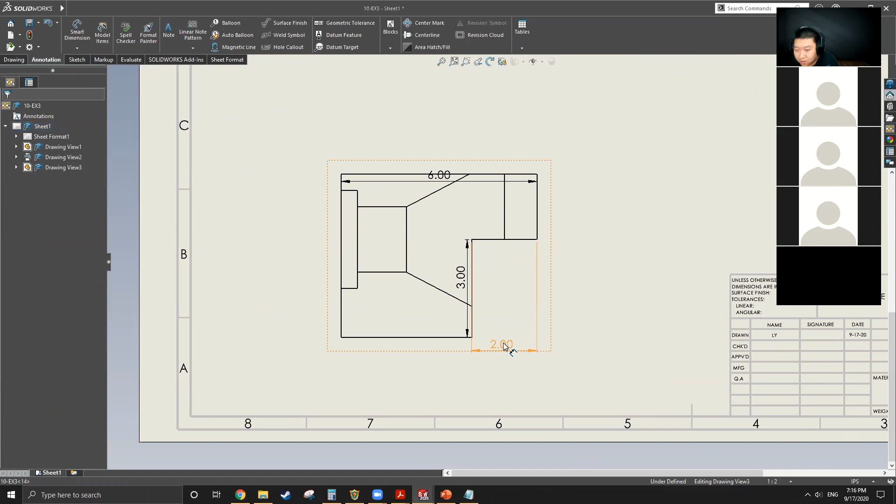And also, don't ever have your annotation inside of the drawing. If you have to, find another way out. For example, make a detail view, and I'll show you how after I rearrange those dimensions. Okay, and this leader line is overlapping with the edge. All right, so right now it looks fairly neat, right?

And if we would like to move a dimension, what would we do? I believe you can hold control and just drag it into this drawing. And now you see you have the 5 right here as a strong dimension. And the 5 is still right there, and you can delete this one. So pretty much hold control and drag your dimension, and it's gonna move to a different view. All right.

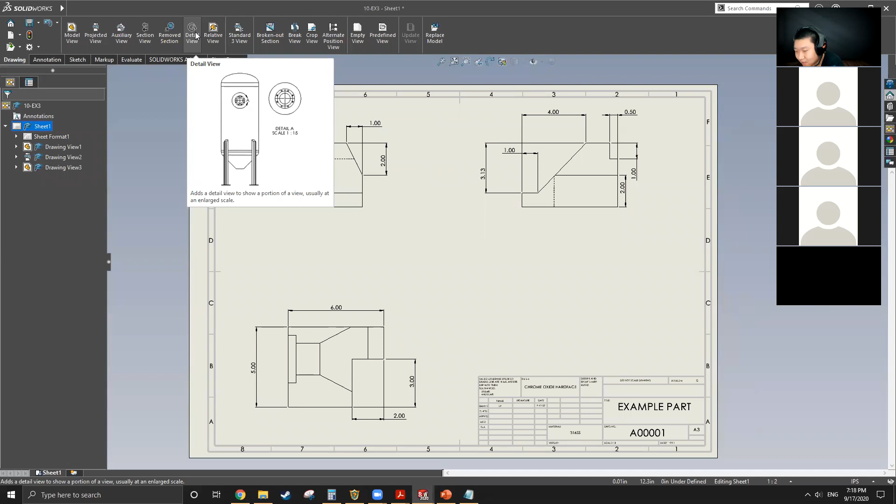So any questions so far? No? No, sir. Thank you. I always feel like if nobody really answers me, I got cut off or something. Because yesterday my internet dropped and I was just talking to myself for 10 minutes and didn't even notice.

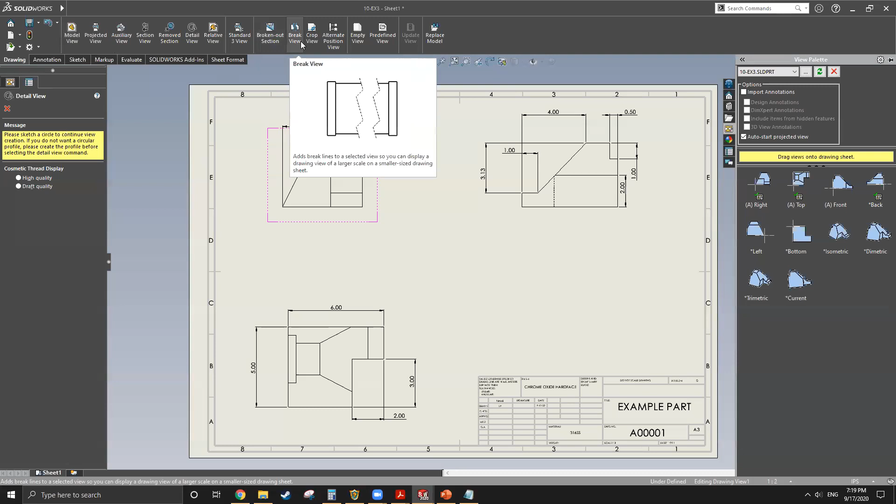So right now, let's do a detail view. So move to drawing. You can see there are a bunch of drawings. Model view is all these 3 views or the other views generated here. You can import different models into the same drawing. You can have 3 or more, 5, 6 different models in the same drawing if you like. And projected view is these 3. And auxiliary view, section view, break view, crop view, all that stuff. And they even give you examples you can look at. Normally, it doesn't really require so many different ones.

And let's create a detail view. Once you click on it, it asks you to select a center point. For example, I want to create a detail view around these 3 surfaces. So I choose this point as the center, or right here, it doesn't matter. I drag it and the circle expands. So now I have a detail view. You can place it anywhere you want, even out of bounds, and you can still drag it back in anytime. So this is your piece of paper that will eventually print. And the outside gray area is your sketch paper. Whatever you have on your sketch paper is not gonna print. It only prints on this piece of white paper here.

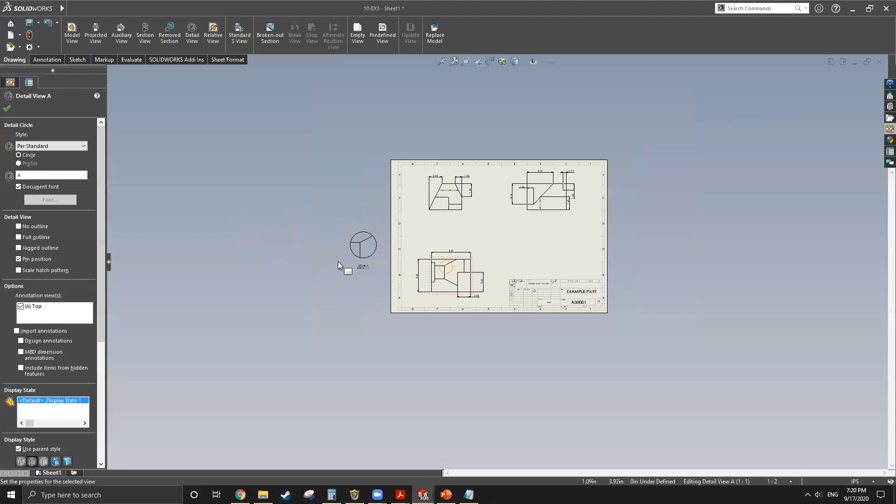So you can have multiple things listed right here just as spares, because when I save this drawing, everything will be saved, even if you have tons of stuff surrounding this piece of paper. So normally, if I'm dealing with a very complicated family table part, I have a whole bunch of tables and dimensions, or even sketches, right here. And when I need to make a modification, I just drag what I need right here, and then label it accordingly.

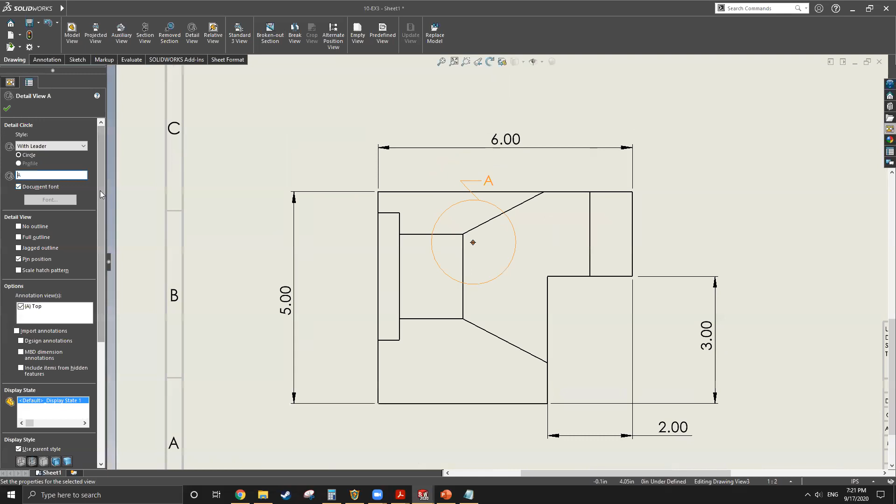So that's complete. And if you click on that little circle, it opens up the property menu, and you can change your style. Change it to broken circle. This is similar to PowerPoint, right? It's a broken circle, with the A in there, and with leader. Normally, I like with leader because it's more obvious to see, because you have a leader right there, and you can add text. Normally, I just say detail A, so you can see it from 10 miles away. And right here, there's a bunch of stuff, no outline, full outline, and pin position or not. Just play with it.

Sorry, moved too fast. The option right here is import annotations. If there's any annotation, you can do that. But unfortunately, in our case, there's no annotation among these 3 surfaces.

So even though I clicked it, nothing's going to show up. And right here, wireframe, or you can do shade. But let's just keep it consistent, do the hidden line visible. This is the most standard way to do a machine drawing.

And the scale, you can change it if you like to. The other thing is just like standard views, so let's drag it right here. And this is the text box. You can see right now it says detail A, because we added a text of detail.

Let's just delete one of the details. Right now it's detail A. Okay, and you can do whatever you like with it. And also, if you want to add an isometric view, right here, isometric view, you can do that if you like to.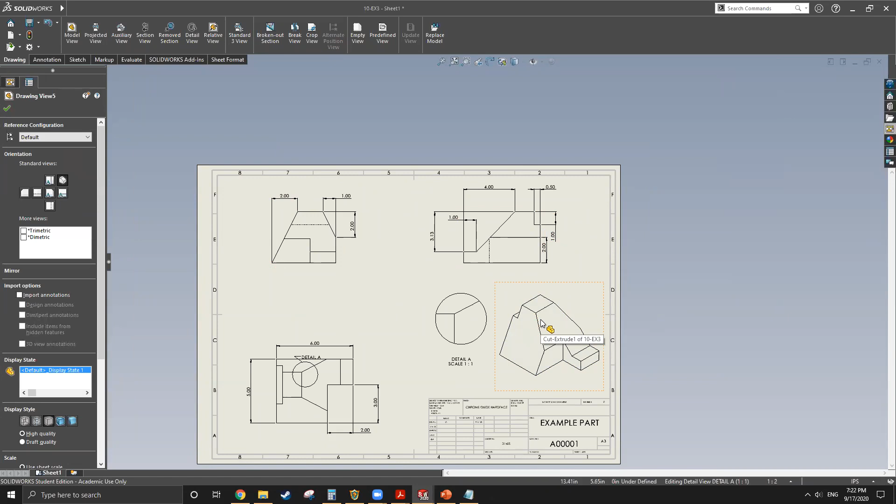Just being nice, give an overview to a machinist, saying this is what the final part should look like. And you can adjust the scale, because it doesn't really matter, it can be really small. Let's put it in the corner.

As I mentioned 2 weeks ago, normally the drawing, pretty much 95% of the time, will have a note section. And how to do that, we need to manually create a table by right click, and there's a table right here, say general table and a bunch of other tables. If you want an Excel-like table, do the general table.

What do you mean by bolden the dimension outline? For example, like this 6 right here is already pretty dark.

The part outline, what do you mean by outline? I'm sorry, that outline really confuses me. Are you talking about dimension itself? Or talking about the leader line? Or...

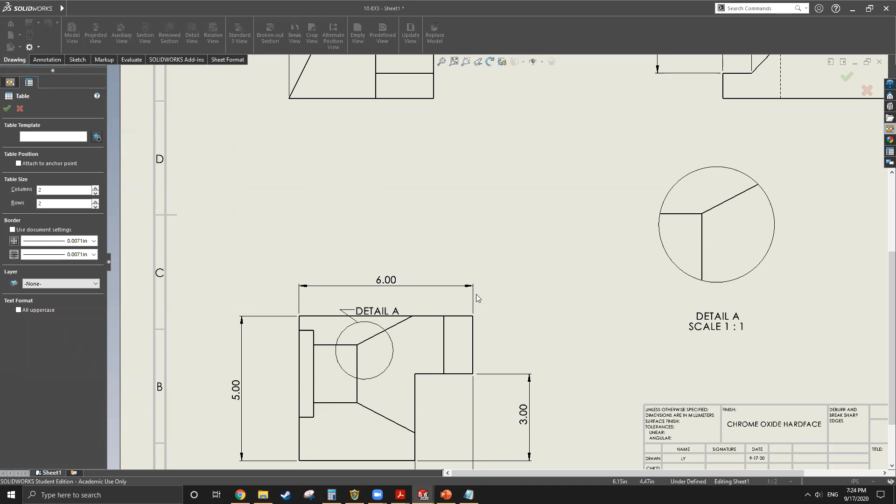Let me do this table first, because we're pretty close to concluding our lecture. And then you can ask me that, let's stay after.

So once you right click table and want to generate a general table, the table templates are right here. Normally your company will have a bunch of table templates, like note table, family table, and subassembly table, something such and such. And you can open up a template.

Otherwise, you just do some modifications right here, click back, click yes, and click back. This is an Excel table, very similar to Excel, and all the operations are similar to Excel as well. You select the entire column by clicking the header, or you select a row by clicking the header, like the most left column, or you select the whole thing by just dragging.

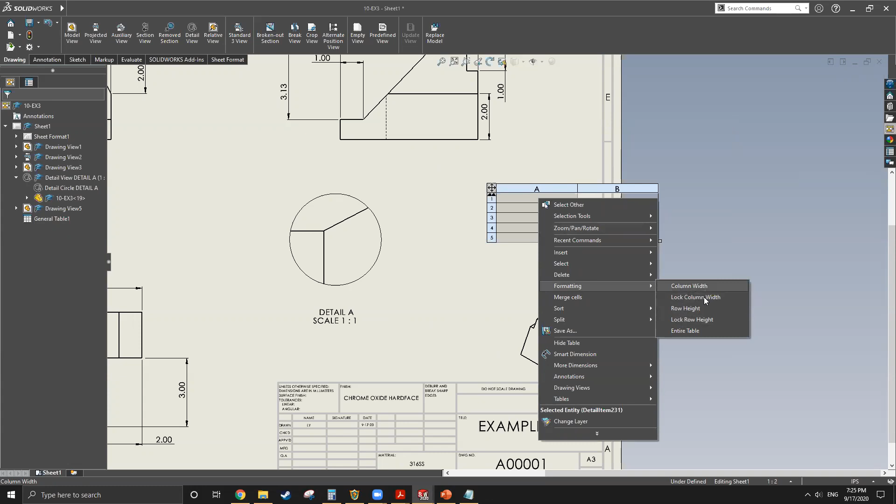And if you want to, for example, change the width or height, it's formatting, and there's a width and height setting. Let's make this really small. So right here, we can just input numbers.

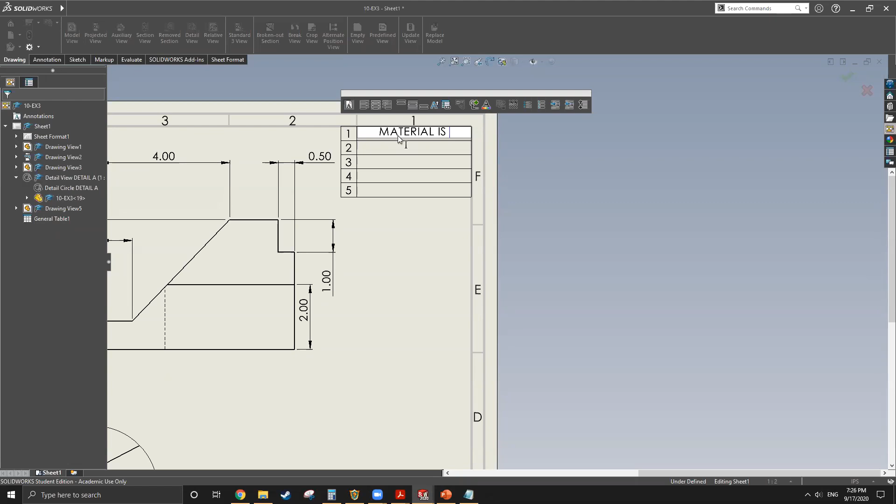So just input here whatever you want this part to have, like material is... like material is, let's say, carbon steel, and here you can change it to say please see notes.

Something like that. You know, anything can be fit on right here as a note. And the machinists will pay attention to this because they're going to read all the notes before they start machining this part.

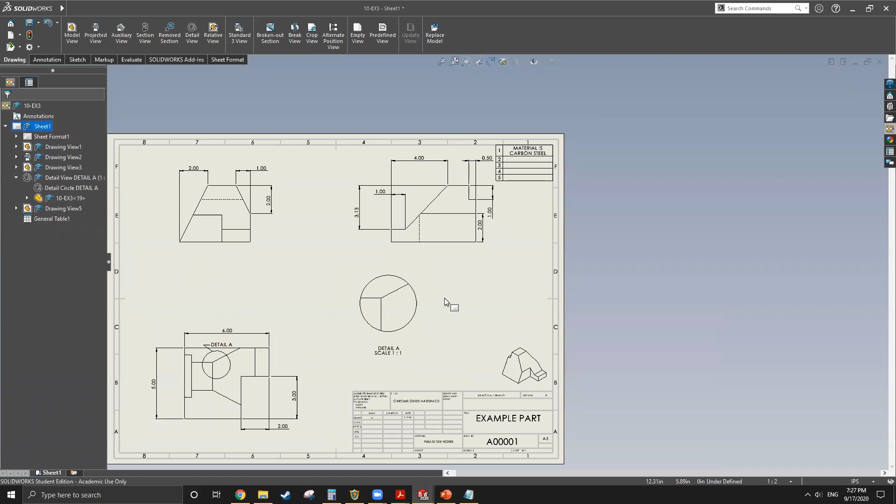So pretty much, this is a very, very simple drawing. Are you guys okay with making a simple drawing like this? Yeah, I think so. Cool, good to hear that, man. Thank you. Anybody have concerns?

Okay. Yeah, please. If you try to follow the video and you make it successfully, that's very great. And if you think you still can't get it by following the video or Google or YouTube or LinkedIn Learning, let me know. I don't mind holding your hands, but you know, we're engineers, right?

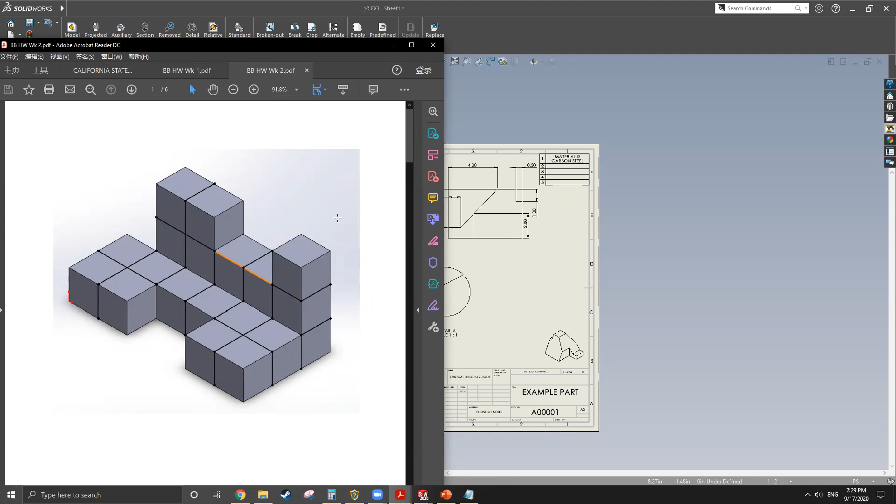So homework 2, there are 6 models. You can see 1, 2, 3, 4, 5, 6. 6 models. Your job is to hand draw 3 projections.

Similar to homework 1, which is mix and match, right? The projections are already provided to you, you just need to label the number and the letter. Homework 2 is giving you the model, but you need to create this for all 6.

So total 18 projections on a piece of paper, or you can do it by SolidWorks by modeling these models and then do the drawing as I just showed, even though there's no dimensions. It's just going to show 3 projections and then save as PDF and submit it to Blackboard. Either you do it by hand, take a picture of your work and submit it to Blackboard, or you do it by SolidWorks. It's totally up to you.

I'll say do it by hand. I can pretty much do all 6 by hand in like 3 minutes. But if you want to challenge yourself, the modeling skill and the drawing skill, do it by SolidWorks because it's really easy to model. And forget about the black lines right here. This is just to show you those cubes are equally sized, the equal size of each cube.

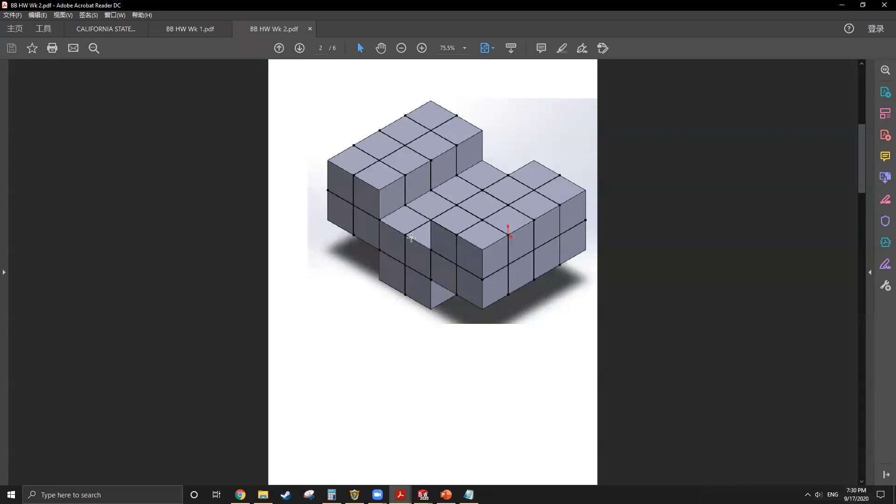So, any question? Yes, just 3 faces. Exactly. Front, right, and top.

Yes, yes, you need to show the hidden line for the holes. For example, this one has a hole in the middle, right? So top view, there's no hidden line. Well, there is a hidden line for those edges, but there's no hidden line for the hole. The front view, you show the hidden line for this hole.

So very similar to homework 1. If you guys can see here, homework 1 has all the hidden lines as well, right? Okay, so kind of like a DLC for homework 1. Same rule, same pattern, and up to you which way to do it.

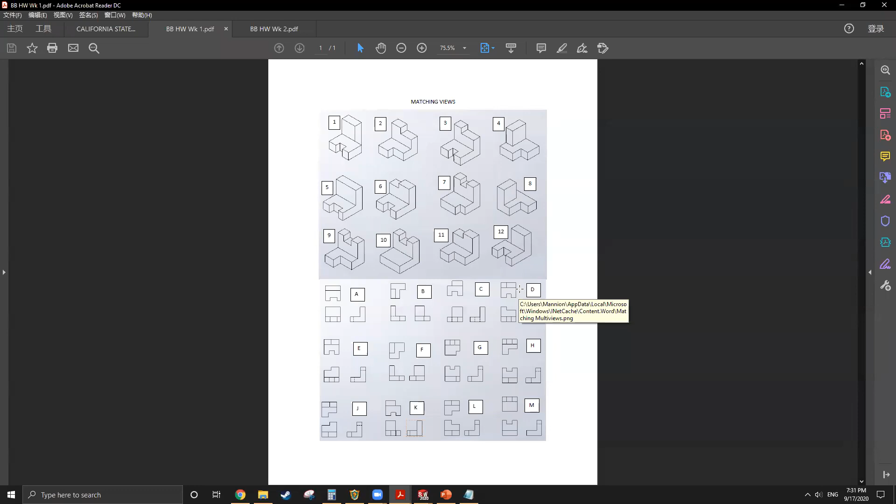But pay attention, if you take a picture or scan it, make sure those are all on the same page. For example, if you take a picture, it might take maybe 6 pictures because 3 projection views per page, kind of like that. If you can fit all 12 into 1 page, that's fine with me. But if you cannot fit it, make sure you create the file as a single file. Don't create like a multiple files.

Post those pictures into 1 Word doc. I don't mind having a multiple pages Word doc, but just make it a single file, okay? Because Blackboard can only submit 1 single file. And if you want to do it by SolidWorks, if you save it as PDF, make it a multiple page PDF. Don't make multiple PDFs. Is that clear?

Okay, if you have no question about either homework 2 or today's lecture, you're good to go. And any question, please stay after, and I'm here to answer it.

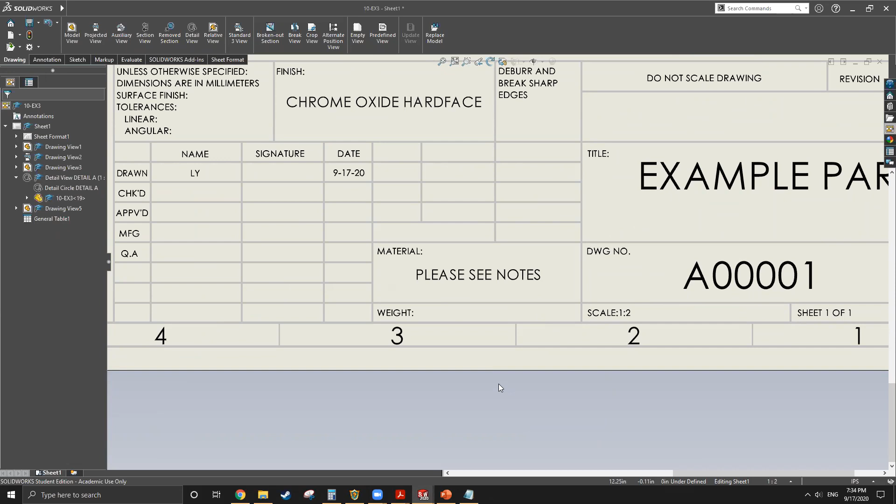No, I mean like if you have a part and it's made out of different materials, and even though you list them, do you still mark them on the part? Okay, so that's why when I go over the title block, I say the material block right here normally doesn't show on this drawing because this part can be made of so many different other materials, right? So when getting to a company, the material should be labeled on bill of material, not the drawing. This one is labeled right here because this is SolidWorks' default template. So I made this as an example, just saying the note can be stated like this, like the material is whatever, but it's not like a guideline, like you should say this.

So, pretty much in industry, you'll never face a situation that your drawing calls out a material and your bill of material calls out another material. That kind of discrepancy is a mistake.

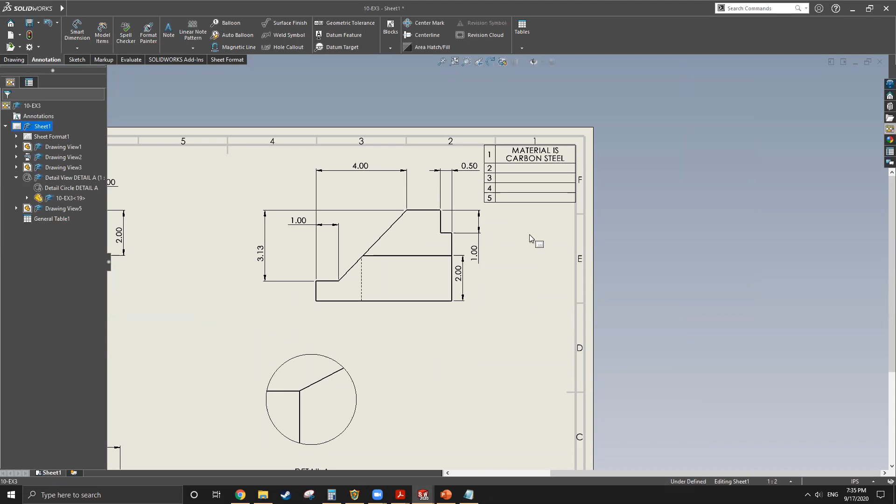Thanks. Yeah. Yes, the lecture is not on Blackboard. I'm going to upload it to YouTube, and you can get the YouTube link from the announcement. I already posted it, so just follow the channel, and all the future recordings will be on there. I will post the lecture recording probably tomorrow, definitely before the weekend.